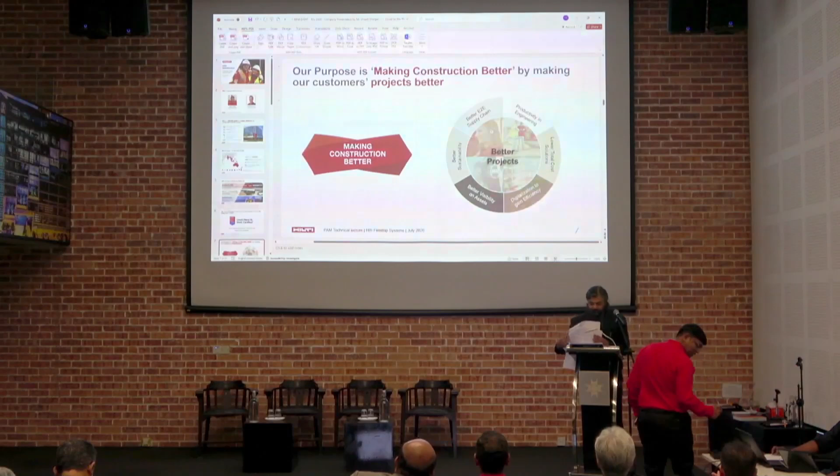Good morning, everybody. It's a pleasure to be here. Good morning, Architect Chong Lee Siong. It was a pleasure to meet you today morning, and welcome to all the PAM members. So my name is Kranti. I know architects like precision, so...

52.17% of my entire life, I've been an employee of Hilti. Hilti is a company that has been established for 85 years. So 28.24% of Hilti's tenure as a company, I've been an employee. So I can see some architects already calculating my age. Yeah, so I have the pleasure of presenting to you Hilti as a company. I always jokingly tell my colleagues, my blood is Hilti red. So for the people who have not yet calculated, I am 24 years with the company now. So I'm 46 years old.

I will take you through in the next 5 to 7 minutes about what Hilti is. Hilti was founded in 1941. There is no full form for Hilti. It's a family name. It's a family-owned company based out of Liechtenstein, with a revenue roughly around 6.4 billion.

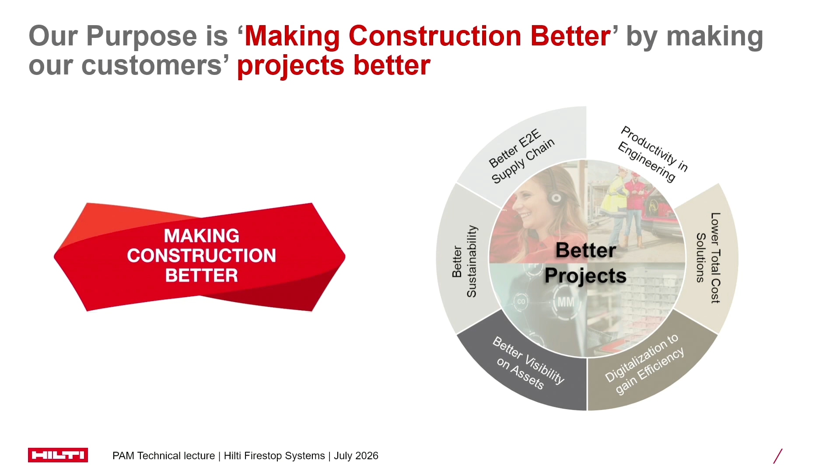So Hilti is actually not just an RE500 company. It's not just chemical anchors, it is not just firestop, it is having hardware, software, and services. We call it a one-stop shop. Hardware, we speak about from precision tools, measuring tools, to hacking, drilling, all the way up to fastening, support systems, and fire-stopping material. So we have the full range. If I'm not wrong, we are one of the only, if not the only, contractor supplier or partner who has this full wide range of portfolio. So that is just product.

When we speak about software, we have different softwares to help or work with the construction industry. We speak about asset management, from tools on the job site to cranes to even small things like air conditions and laptops. We have an asset management software which is quite successful in Malaysia. We have FieldWire, which is helping in collaborating on the job site. And then we have, specifically for engineers and architects, what we call PROFIS Engineering software, which is a code compliant anchor design system.

And when we speak about services, we don't just stop at hardware, having world-class, top-class hardware. When we are investing 7.21% of our revenue in R&D, we don't just speak about software, but also holistically serving the customers. From repair services to consulting services, meeting the customers in the office, meeting the customers at the job site, meeting the customers in seminars like this.

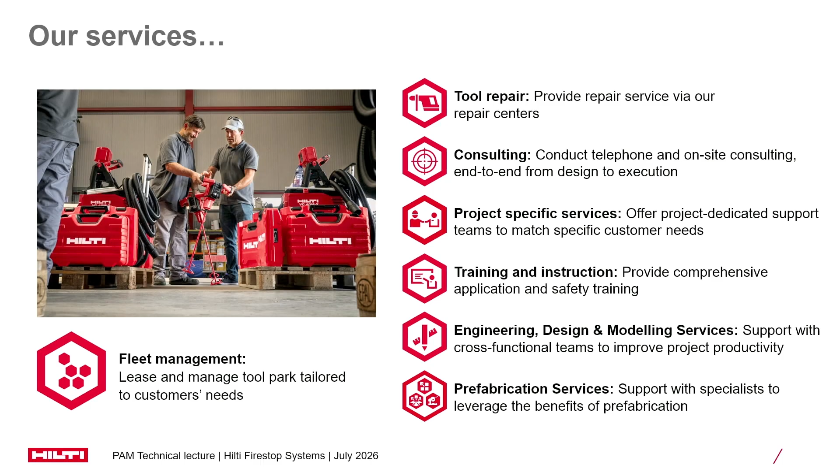The name of the program is Spec to Site. That's the way we work. But I would like to invite my head of engineering to take you through the program of Spec to Site. So Umesh, welcome. Thank you very much.

Good morning, everyone. My name is Umesh. I'm the head of engineering for Hilti Malaysia. As Kranti said, more than half of my professional life is with Hilti. So 18 years I'm with Hilti now, working with India and Malaysia. In Malaysia, I've been here 4 years plus, working in different roles. So that's my brief. And today I'll speak about Spec to Site, which is a program from Hilti.

I'll explain briefly how we support on all the services, on selection of products, how we specify, and how we also ensure that the specifications get translated into reality at the job site.

So generally, as an architect, when you do drawings or specifications, we tend to observe that many times your specification, drawings, or recommendations do not exactly get replicated at the job site. There is some mismatch here and there. So to resolve this problem of miscommunication and mismatch that you face daily at the job site, we as a team from Hilti support all the architects and also the contractors to culminate and complete the whole cycle of application at the job site.

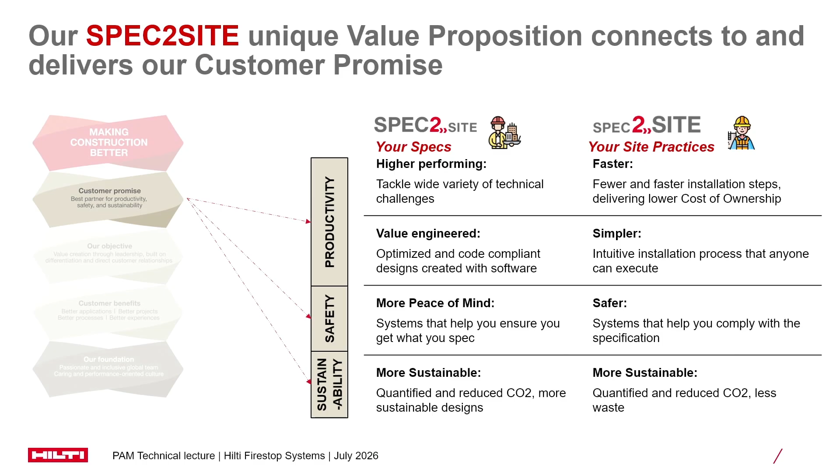And these solutions are sustainable also for a long term. I'll go into detail. From the contractor side, the tools and equipment we supply, and the trainings we provide, bring more safety, and the solutions are simpler and faster. So overall, all the solutions we bring in, from the specification up to execution, are sustainable.

I'll go into detail on the spec side. On the left side, we have multiple product lines or systems which can help you select for a very complex situation at the job site. Your job sites can be simple, medium complex, or very complex. Our systems, which are UL based, FM approved, or EN standard based, can help mitigate all this complexity at the project site.

With the help of BIM or AutoCAD drawings, we can help you create BOQ and also good standard specifications, which help you and the contractor at the job site get more clarity on how to do the application and what product lines or system solutions we are applying there.

There may be situations where the application is out of the scope of your codes and standards. We can arrive with engineering judgment, which is based on the testing we do and the extensive experience and R&D we have. We can produce documentation of engineering judgment so you can create your specification on a strong basis.

And this gets applied through BIM, AutoCAD drawings, or any other medium you'd like to specify at the job site. This brings a lot of peace of mind, ensuring that whatever fire rating or safety measures you want to achieve through the application is applicable through the specification.

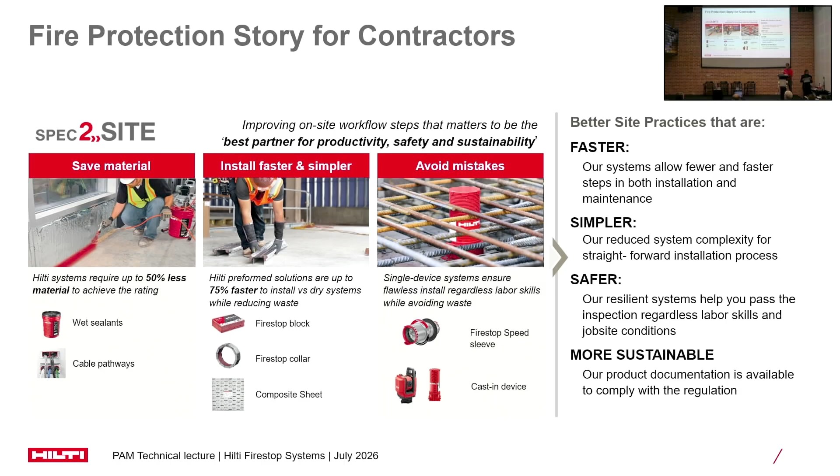So the spec side covers right from the design or concept stage of a project, where we can specify as per code methods. We can provide all the general notes, specification text, and typical drawings.

We have an online fire stop selector. If you go on the Hilti website, you can find a fire stop selector where you drop down your condition and country. For example, you're doing a project in Singapore but sitting in Malaysia or Thailand, you can just select your country, and it will come out with the local design methods. Based on the application, you can select what Hilti system, UL or FM based, you require. This FireStop selector is free of cost.

You can use it on our website anyway, and our engineers can help guide you to select the material. Then we have trainings, which are individual—we can arrive at your office and provide training, or to contractors, on how to do the application, how to select the system, and basic information on the FireStop topic.

We have estimations—for example, through BIM or AutoCAD solutions, we can help you do budgeting or bill of quantities estimation prior to execution of the job site, so you can have budgeting done for your tenders. Once you prepare drawings for your projects, or have a BIM model, for example nowadays data center or infrastructure projects run on BIM, we can support through the BIM solution how material quantities can be estimated and specified.

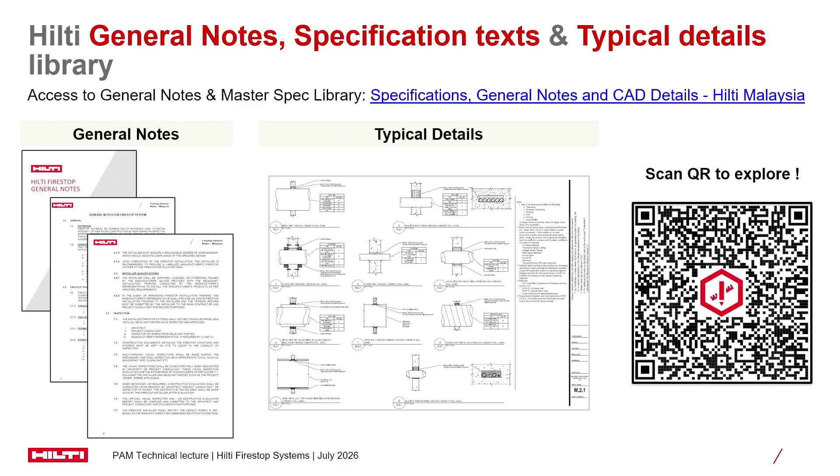Our product baskets are set into three categories: through penetration, linear construction joints, and facade joints. All three applications are covered through Hilti systems, whatever your project may be - data center, industry, hotel, commercial, or residential. Everything can be customized, including critical industrial projects with long cable runs that need fire retardation. All these applications comply with UL system, EN system, MS 1183, and our product lines are BOMBA certified.

When BOMBA comes for inspection, we can provide the inspection guide. All these product lines have additional attributes like acoustics, paintable area, dust-free or airflow-free options. These attributes aren't only associated with fire rating, but can help your projects - for example, a data center needing airflow control can get airflow ratings, or if you want dust-free environments, we have preformed devices that are completely dust-free.

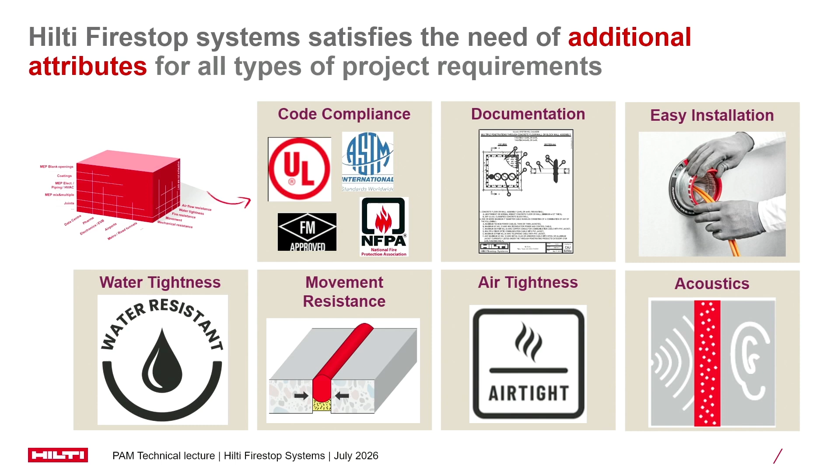Lastly, many of your projects nowadays are green buildings, so we can help with CPD and LEED certification points, where our products are associated with points that can immediately help cover your LEED requirements. This helps with your sustainable projects or green building certification.

When we complete the project, we have inspection guides. This QR code displayed outside lets you download the inspection guide, so whenever you go to the job site you can tick mark that all steps have been done, ensuring the application is correct. If there are deviations, we're always available at the job site to help mitigate challenges. This QR code is on the booth and also available on our website, and our engineers can come to your office for any services.

In summary, Spec to Site is a program from Hilti offering end-to-end solutions for your complete project cycle, supported by Hilti's engineering team and sales team. That's a brief overview from my side. Thank you, and we can now move to the next session.

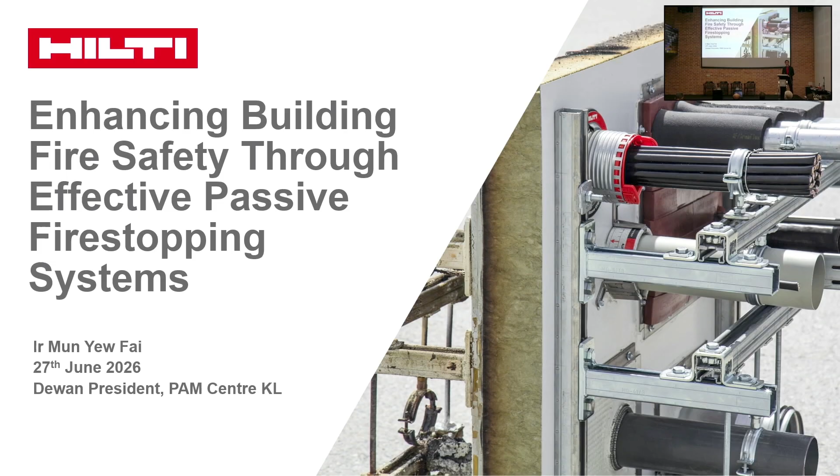So today I'm going to talk about how we actually enhance building fire safety through effective passive fire stop solutions.

Topics that I will cover today is why do we need to look into passive fire protections, and what is fire stops that help on the passive fire protections, and where do we use it, as well as how do we actually apply it correctly for our project and also implementations, and also sharing a little bit with you how do we look into the best practices for fire stopping applications. And I will wrap up with a little bit of summary there.

Now, passive fire protections, why do we need it? Taking the statistics that we are aware of from the Fire and Rescue Department, this is actually taken from 2018, where there were already 50,000 fires happening and attended by the fire departments alone in 2016. And this actually involved 107 people who died during the fire events. And not only human life, there's also damage to property and assets estimated at 2.5 billion.

And throughout the years, the awareness is increasing, but still there are many areas that we need to consider and take care of in terms of fire safety. If you look at the photo on the right-hand side, it's actually the EPF building caught in fire in 2018. The facade is actually caught in the fire. Luckily, there were no major problems, and now it still remains in a damaged state.

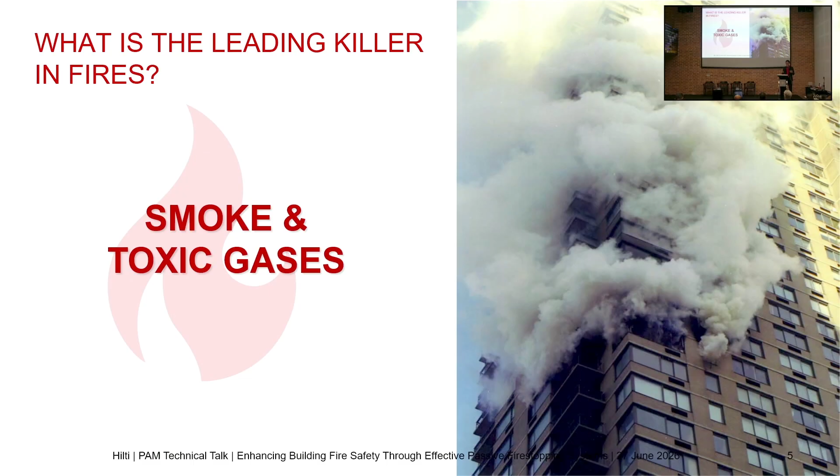All right, so basically during fire events, the major killing factor is not only the fire, but it's actually also the smoke and toxic gases being generated. So when the fire happens, it burns all the materials that are combustible and creates all kinds of carbon monoxide, causing people to inhale it and get killed during the events.

And there are also some fire statistics that we took from international references. For example, there are actually 3.8 million fires happening per year worldwide, and about 45,000 actually died during these fire events. You see that actually 3 out of 4 fire deaths are actually caused by smoke. So we cannot just think that fire will kill, but instead the smoke and also the toxic gases generated also cause people to inhale and die during the events.

And also an interesting fact: about 57% of fire deaths are actually not happening at the origin. This is because when caught on fire, people will escape, so that's why people will run away. But if the escape route is not safe, death is caused not only by the fire, but also by the smoke. Actually, the smoke travels faster than the fire. So this is why a lot of the time, most cases of death are caused by the smoke.

This is just an illustration of how important fire compartmentation is. Typically, 5 minutes is all you get. Fire, and especially smoke, spreads through a building much faster than most people think. Every year, about 3.8 million fires occur worldwide. While damage to assets is in the billions, the yearly death toll amounts to 45,000 persons. Much of this could have been prevented if correctly installed fire protection had been in place.

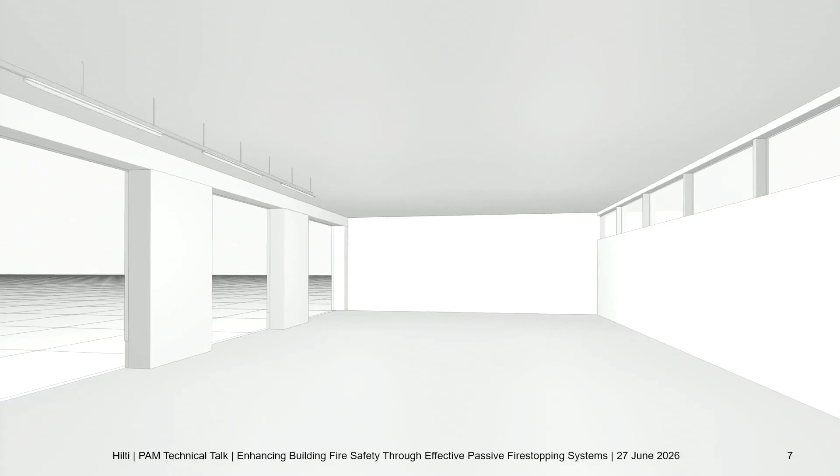Architects, planners, engineers, and building owners are responsible for effective fire protection. Oftentimes, they do not realize that fire stop is not an option—it's a clear legal requirement, and negligence or improper execution is a violation of the law. Nearly 60% of fire deaths are not in the room of the fire's origin, and 3/4 of all fire deaths are caused by smoke. When there are through-penetrations in walls and floors, toxic smoke easily spreads to adjacent rooms.

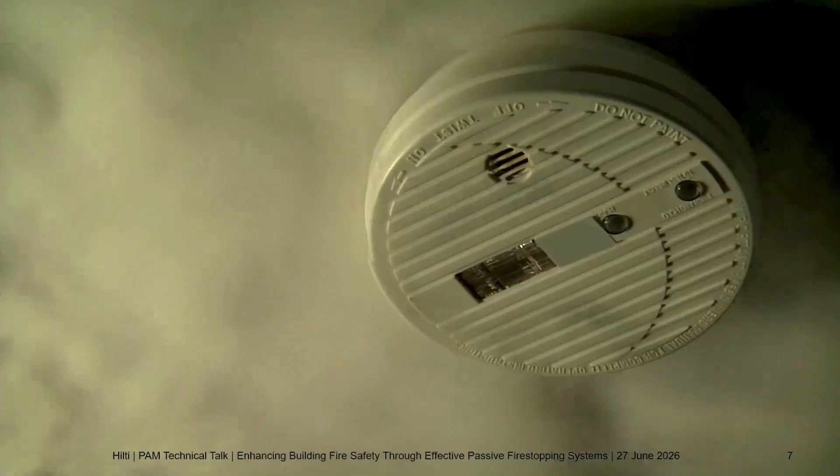The keys to effective fire protection are both active protection, such as detectors and sprinklers, but also passive protection. Passive means that penetrations in walls and floors have been sealed with approved fire stop products. This principle is called compartmentation. When installed correctly, fire and smoke won't be able to spread from one compartment to another. This allows for safe evacuation of people and protects valuable assets.

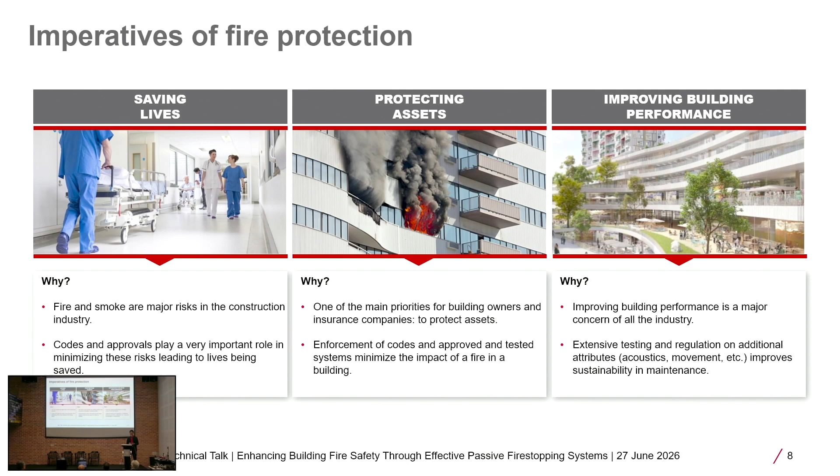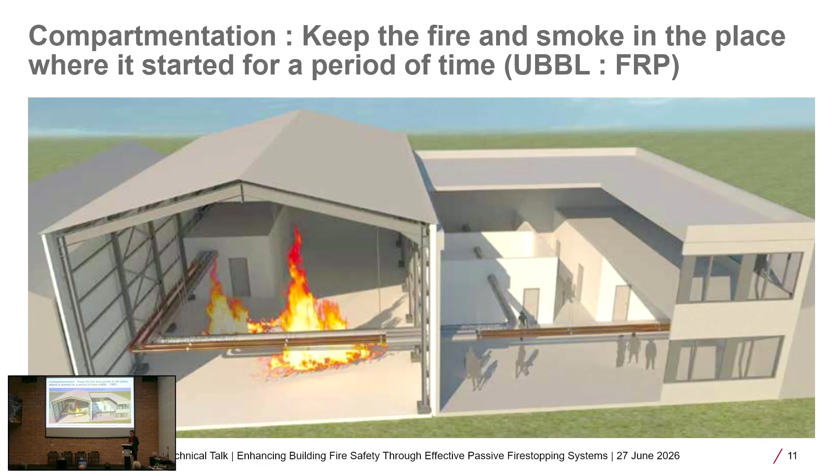Now, like what I mentioned just now, basically compartmentation is to keep the fire and the smoke in the place where it started, for a period of time. So with this, we call it fire rating or fire resistance. This is just an illustration: fire happening at the left compartment, and we want to provide effective compartmentation so that the people on the right-hand side can have sufficient time to escape and go to the safe assembly point.

Now, this comprehensive guidance can also be found in the Guide to Fire Protection Malaysia 3rd edition, and today it's also available for purchase at the PAM booth outside there. So if anyone is interested, you can actually get a copy from PAM Executive. Over on the right-hand side, just to give you an idea, the comprehensive guidance on passive fire protection is actually in Chapter 4. And if talking about compartmentation specifically, that's Chapter 4.3.

And referring to the same guide, Section 2.3 mentions that the building should be considered as a whole. Here you can see that passive fire protection is actually very important to consider during the planning stage as well as the design stage, so that it can be used to mitigate fire hazard and fire risk. It further mentions that subdividing buildings into compartments, both vertically and horizontally, is to contain the outbreak of fire, smoke spread, and fire spread. So an effective passive fire protection can only be achieved during good planning and design at the beginning, as well as design construction, so that it can provide the basic functions of the building for fire safety.

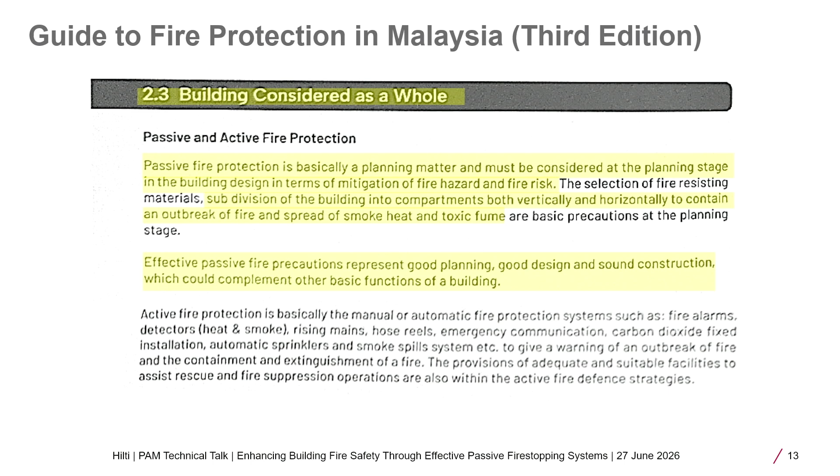Speaking about compartmentation, a very important element is fire rating or fire resistance. The compartments that form this compartmentation are basically walls, floors, and partitions - vertical and horizontal elements. Fundamentally, when fire happens, we need to ensure the building is stable and structurally sound. For building design, engineers also need to ensure buildings are given the right fire rating through the Eurocode design, designing the slab, column, and wall to be fire rated according to Eurocode.

Secondly, it's also important to consider integrity - the ability to resist fire and smoke spread from one compartment to another. This is another very important consideration. Last but not least is insulation - the ability of thermal insulation to resist within a temperature limit from the exposed side to the unexposed side. All these three elements form the fire rating, and you can get further reference from the guidebook.

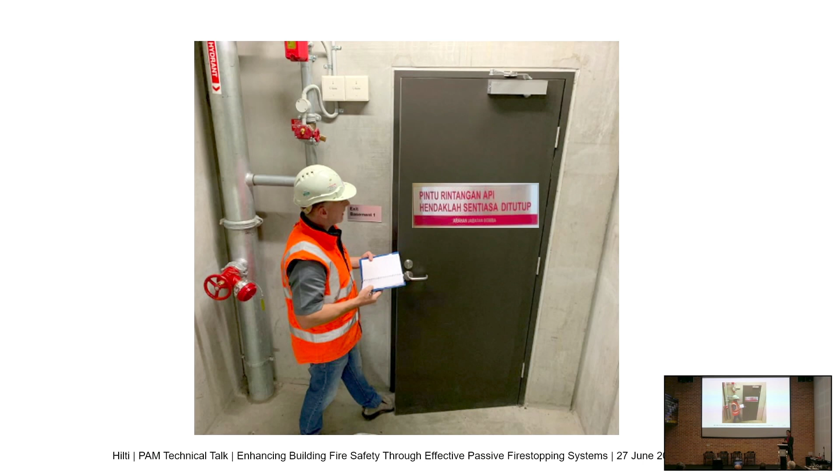Within this compartment, you can see a live example of why there's an instruction here. It's actually a very important message to everyone to ensure this door is closed at all times, to ensure effective compartmentation and fire protection. This is also Arahan from Jabatan Bomba. It may look very simple, but it actually forms a very important safety measure for our building occupants.

Apart from door openings, there are many hidden areas we may not be aware of but are actually essential. All these unavoidable openings and gaps are caused by fundamental MEP services - mechanical, electrical, and plumbing - which provide services for our building's performance and basic functions, like air cons, electricals, and water supply. Unavoidably, these are required to pass through the compartment wall as well as the compartment floor. When there's an opening or gap, it must be sealed and remain sealed to maintain its fire resistance or fire rating.

Here's an example - penetration can happen at the wall, on the floor, as well as at the joints on the building side and at the top of wall joints. Sometimes when designing commercial buildings with full height curtain walls, there will always be gaps at the perimeter. All these weak points need to be sealed with the right fire stop solutions.

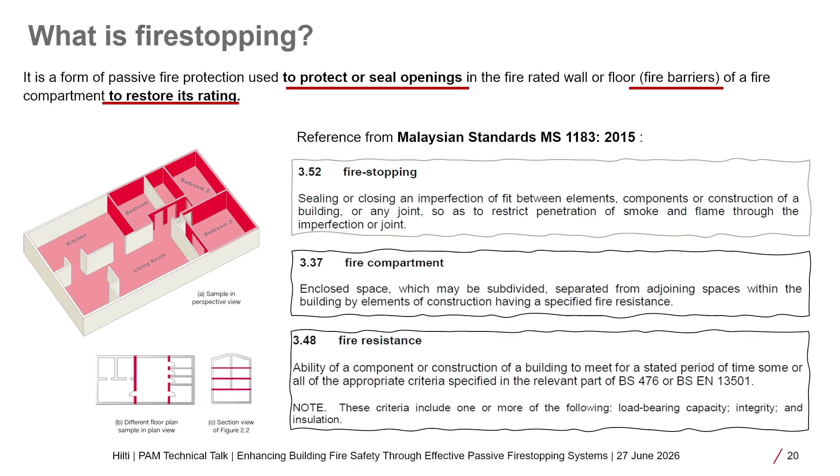So we need to understand what fire stops are. Basically, it's a form of passive fire protection to protect and seal the openings and joints on the fire-rated wall to restore its fire rating. For a more precise definition and guidance, you can reference the Malaysian Standard MS 1183, section 3.52, which states that fire stopping is to seal and close the imperfection between elements of any joint to restrict the penetration of smoke or flames.

And how does the fire stop system actually get the rating? Basically, it's through the system testing. Fundamentally, as Mr. Umesh mentioned, there are 3 major applications regarding fire stop systems: through-penetration, joints that can happen in any part of the building, and perimeter edge of slabs which is mainly relevant to curtain walls.

So the testing actually makes reference to international standards. If we're talking about design requirements complying to the Eurocode, then the testing would be EN 1366 Part 3 for through-penetration and EN 1366 Part 4 for joints. If we are handling projects with clients based in the US, we probably need to refer to American standards. Then the testing standards for fire stop systems also make reference to ASTM as well as UL. For example, for through-penetrations, the ASTM will be E814 and also UL 1479.

Locally, we also need to refer to the testing guidelines approved by BOMBA. There's also a lot of testing still referring to generic testing standards such as BS 476. Just a little additional information here - BS 476 are actually very legacy test standards, and over in Europe they are also, part by part, being phased out. I understand it's going to be totally phased out by 2029 or 2030. So the current trend is more and more towards updated testing standards with the Eurocode standards and also ASTM.

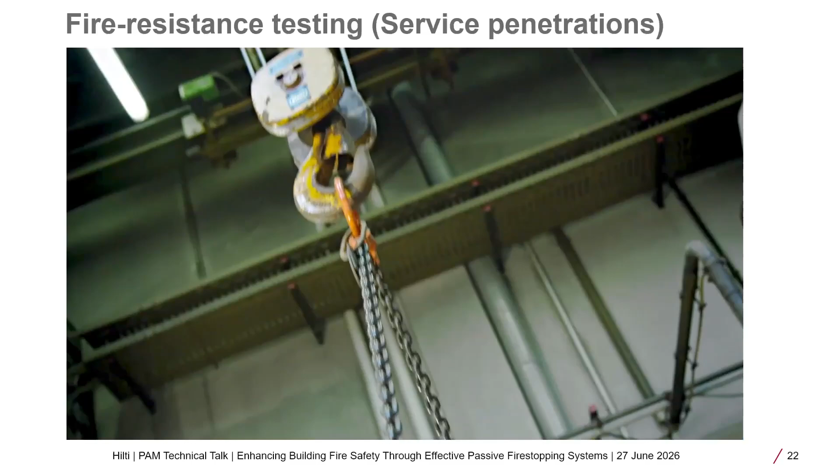So let's take a look at the video of how the testing is being carried out. All installation of fire stop systems needs to be according to the guidelines and testing standards. For this case, it's being installed as a mixed penetration, put into the furnace, and then exposed to the ISO fire to the relevant requirements. Then we take the measurements and also take the record to see its performance.

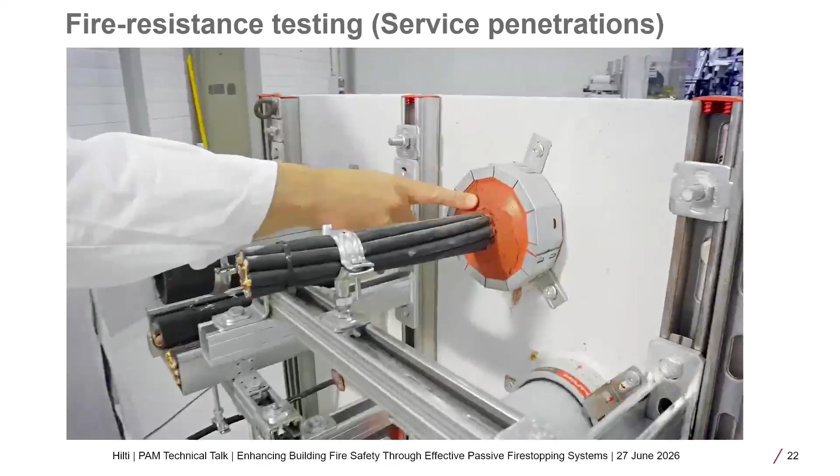After testing, for this hose stream test, additionally by ASTM, we need to ensure stability after the things being burned off. So an effective fire protection system is one where the exposed side will be totally damaged, but the unexposed side should still remain intact. This is the wall fire protection system where the unexposed side is still intact and the fire side is all damaged. So it needs to serve to contain the fire within the compartment.

Here's an example of system testing under European standards, showing how they look into fire ratings. After the testing, they will come up with comprehensive technical reports. It needs to contain all kinds of testing information like pipe diameters, thickness, the material, and last but not least, the fire rating. So 120 indicates 2 hours, and 60 means 1 hour.

System testing is applied not only to through-penetrations but also to joints as well. Similar system testing is carried out but according to different guidelines. For joints, it's also catering not only for fire safety but also other attributes like movement capability. Sometimes buildings will be subjected to deflections during their service life - subject to wind load, seismic activity, and so on. So all this kind of movement or displacement is being tested alongside the fire safety perspective.

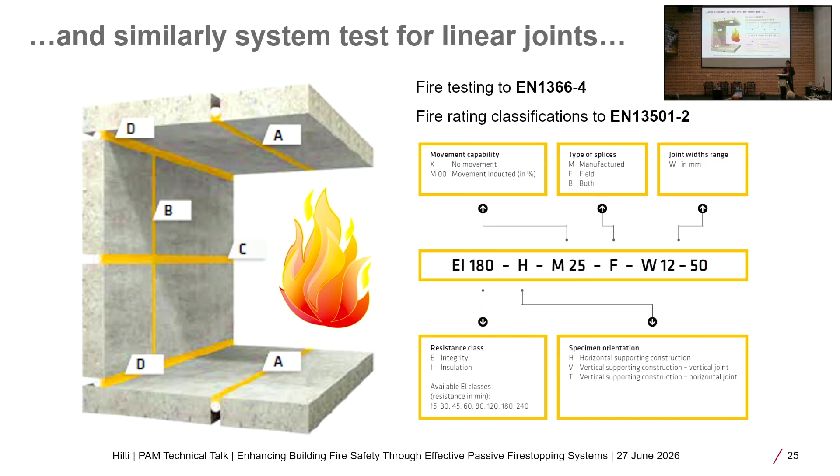For everyone's information, fire stop is not just sealants - it can come in different forms and types. Some basic fire stop solutions include mortar, sealants, foam. We need to look into the requirements and different considerations like the penetrants, the fire rating, the sizes, opening, and so on. Throughout the years, with advancing technology, more innovative products are being created to serve the same passive fire protection purposes. We call these preform or factory assembled devices - it can be composite boards, sleeves, blocks, cast-in devices, and so on. These form a more productive and enhanced safety solution in terms of installation and the passive fire protection perspective.

Among the materials, there are different kinds being used: intumescent type, ablative reactions, endothermic reactions, and insulations. Among these, the most important terminology or material type is intumescence. It's actually the ability of the material to expand when exposed to elevation of fire or heat. So why is this important? Let's take a look at how it works.

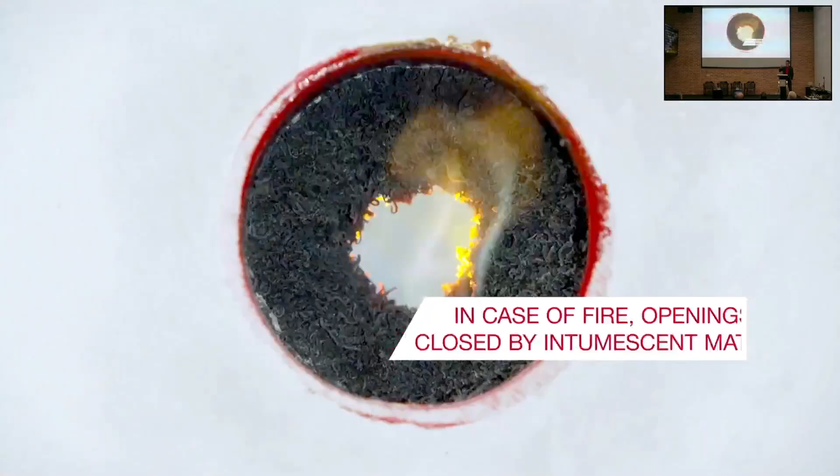Imagine there's a combustible penetration through the fire-rated wall, for example a plastic pipe. When it's being burned, the plastic pipe easily melts off, leaving an opening. We require the fire stopping to have intumescent material that expands and closes up the opening to prevent fire or smoke from spreading to the other side of the compartment. This is an illustration of how intumescence works.

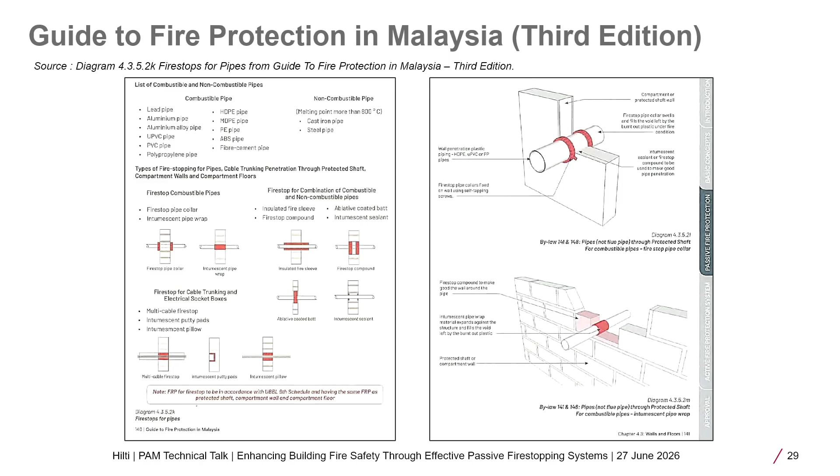I'd also like to share that the Guide to Fire Protection provides comprehensive guidance on how we consider fire stop systems. You can refer to diagram 4.3.5.2K, which shows fire stops for pipes for passive fire protection. Specifically, it mentions that for fire stopping of combustible pipes, the fire stopping material is required to be intumescent, and this can come in different types.

Depending on the design requirement, if you're catering for especially large pipes, you need a fire stop pipe collar, because you need to contain the fire stop material and force it to expand inwards. There are also different types of forms available.

For fire stopping, basically we can look into two major applications: the first is through penetration, and the second is joints. All of this needs to be treated as a system solution, to tackle the very complex penetrations passing through these fire-rated elements.

Putting it more simply for your reference, joints can be looked at as wall joints, top wall joints, edge of slabs, and so on. On the other hand, common applications for through penetrations include pipe penetration, electrical cables, and very complex M&E services passing through fire-rated walls and floors.

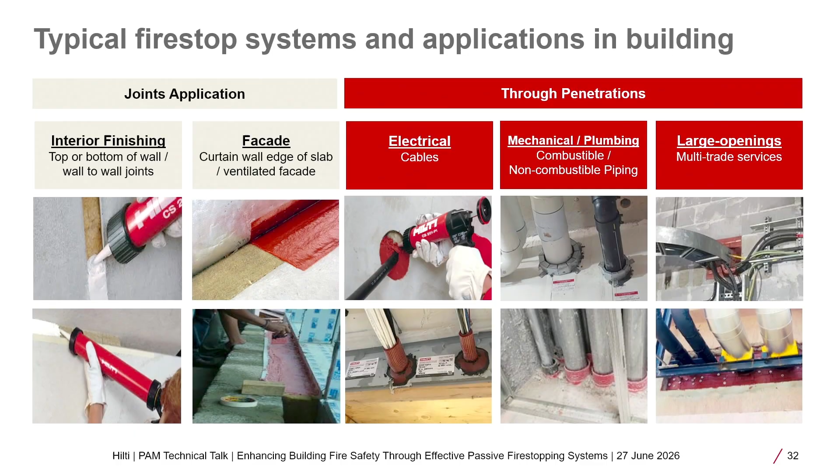After looking into what fire stopping is, let's look at where it's used. As I explained, there are many unavoidable gaps and openings penetrated by MEP services, very commonly found in modern buildings.

All these services run not only horizontally above us, but sometimes also vertically in some utility rooms at the sides of buildings, which are covered by the room. Nevertheless, all of these are penetrated and require openings to pass through, and all these gaps and openings need to be sealed up.

Fundamentally, we need to locate all these weak points within a building so we can select the right fire stop systems to tackle them and provide the right fire safety for occupants. For example, sanitary plumbing, mechanical penetration by air cons, ducting, and electrical penetration are all very commonly found weak points in our buildings.

Not only can these fundamentals be found in buildings, but different types of buildings also require different attributes. For example, healthcare facilities mostly operate 24 hours throughout the year, and most of the time have a high level of occupancy by patients and medical practitioners, so the fire safety levels we need to address are much higher.

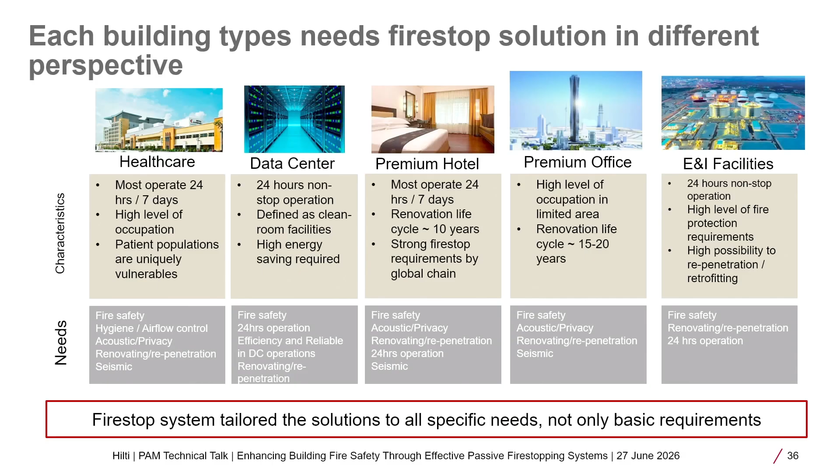So this shows how critical and important it is for us to ensure that fire stop systems actually work properly and effectively.

For reference, there are many critical areas in a hospital that require our attention and need to be protected with the right fire stop systems. For example, the surgery room, the patient room area, ICU, M&E shaft, and so on. All of these are critical areas we need to look into, and any gaps or openings we need to seal with fire stop systems.

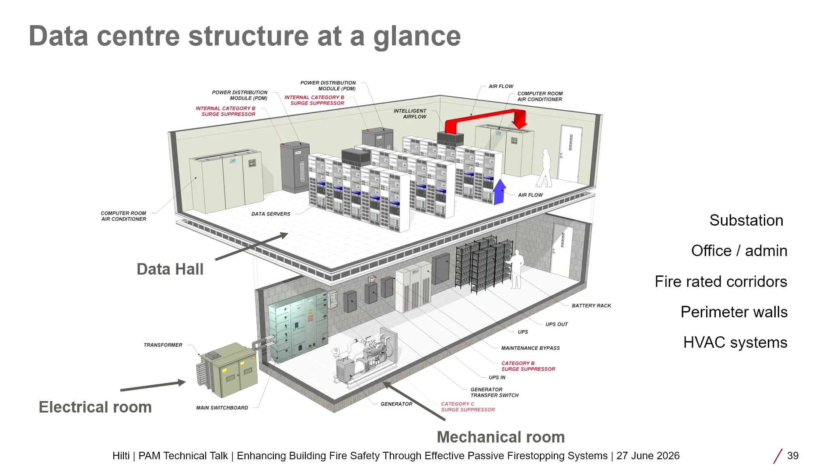Like I mentioned, data centers are a hot topic in the market now. Same as with hospitals, there are many different design conditions and elements we need to cater for. Fundamentally in a data center you always have the data hall, electrical room, and mechanical room. Other than that, there's also admin offices, fire-rated corridors, substations, and so on. All of these are essential and critical areas we need to cater for in terms of fire protection.

So just to give you an idea, not comprehensive but the most important elements - cable penetrations are something we expect in the data center halls. We need to think about something which can allow the cables to pass through the fire-rated elements, like cable transit, electrical penetrations, and pipe penetrations.

For data center infrastructure, normally we're not only looking into the basic design requirements, but some areas actually need to be fiber-free. So sometimes we also hear about design requirements like clean rooms. We need to cater for this kind of requirement when selecting the fire stopping systems.

So this kind of preformed solution actually fits perfectly with this clean room perspective. Because if you use the conventional sealant type, basically you need mineral wool as a packing material, and when there's construction inside this compartment, it will contaminate with fibers. So we need to think about using different innovative solutions to tackle the fire safety perspective.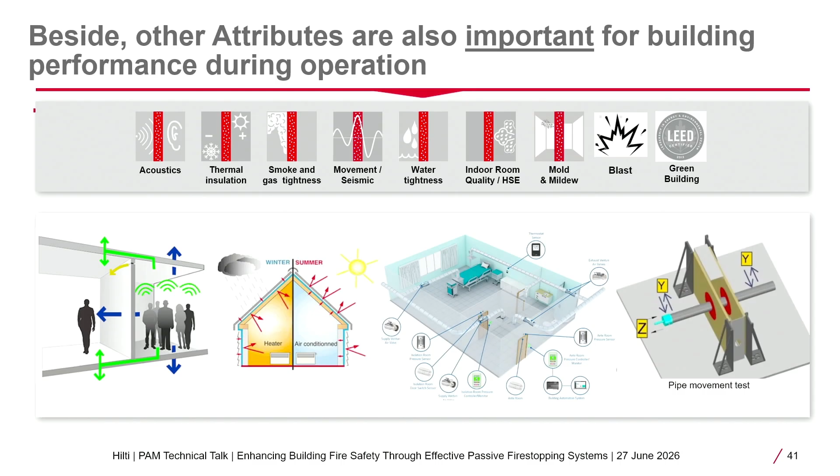Now, we know the solutions, we know the systems, and how to design them into buildings. But when it's not implemented properly at the job site, it doesn't bring the right intended functions and performance. So we also need to understand how it's applied at the job site and how to do it right.

Now let me give you an example and illustration here. This is a steel pipe penetrating through a wall with an opening of 230 and 2-hour fire rating.

We need to understand the design requirements from a fire engineering perspective, and the regulations from BOMBA and UBBL, and any other code of practice we need to reference, like MS 1183. So the three fundamental elements we need to look into are: assembly type - what type of building element are you requiring, whether it's a floor or a wall.

The question you need to ask is what type of building element, whether floor or wall, and what construction is being penetrated - what material, for example a concrete wall, masonry wall, or other materials like sandwich panel, and what are the dimensions of the opening.

Secondly, we need to look into the penetrating items. As I mentioned, in a building we fundamentally have M&E services - it can be ducting, electrical conduits, cable trays, and so on. We need to understand all of these so we can select the right fire stop solutions to tackle the fire safety perspective.

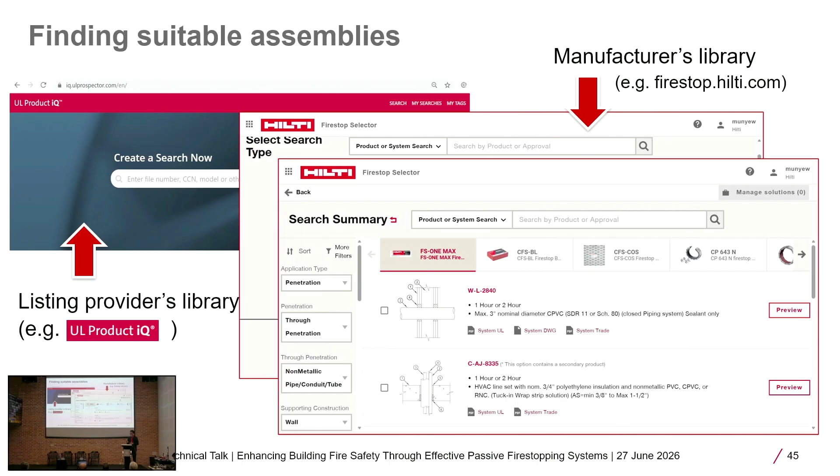So if you ask which type is suitable, for information, from BOMBA's perspective, they are accepting the testing standard from America as well as the testing standard from the European standards. So it also comes back to what are the project's requirements and how do we better advise our client. Sometimes the client is from America, then most likely the specification and design requirement could be fully referred to the American standards.

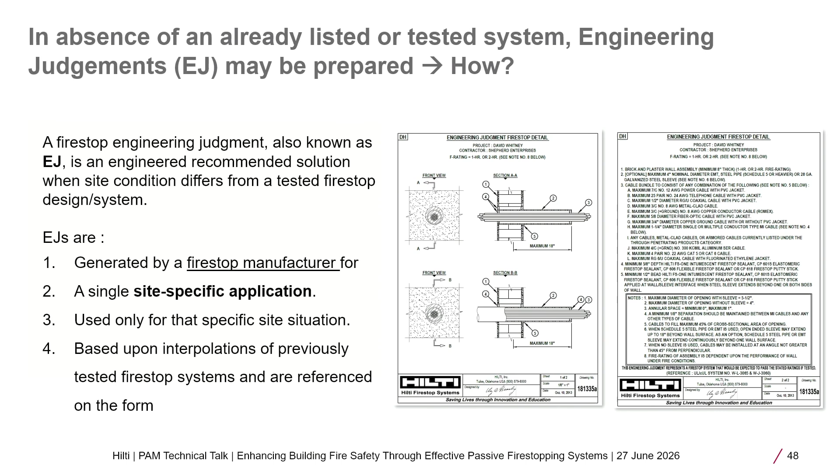Understanding how to install it is also very important. Fundamentally, we need to know basic information like what are the fire-rated elements being penetrated, what is the penetrant, and also what fire stop system to refer to. For example, this case is referring to the UL listing, and there's always a system UL listing reference number that you can cross-check and refer to.

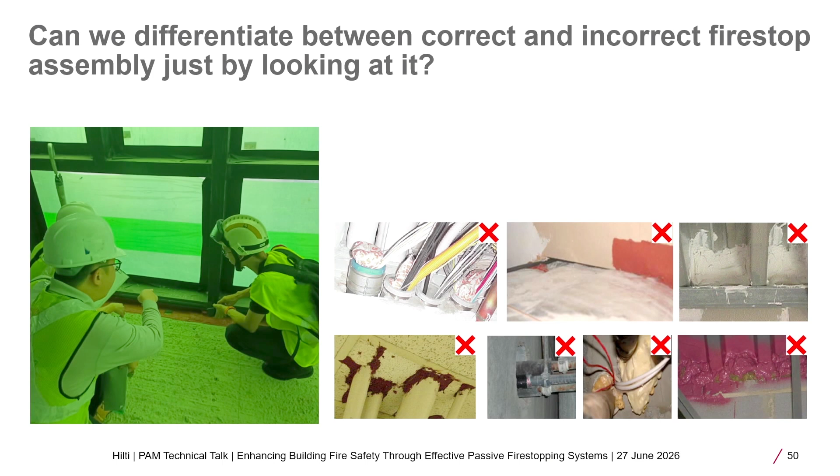The test scenarios featured in this video were created in UL facilities, designed to simulate realistic configurations and fire progression when the right solution is not being used or not installed properly. Each scenario includes a matched set of penetrations and joints: one fire stopped correctly using a UL listed fire stop design, and one fire stopped incorrectly using an unrated design. All correct materials and installations shown comply with UL 1479 for penetrations and UL 2079 for joints.

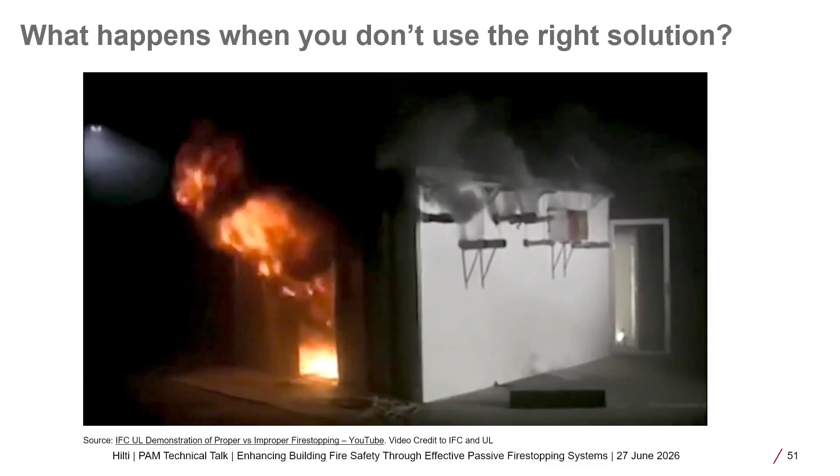These initial scenarios illustrate a very common mistake. While fire stop sealants have been used in the incorrect installations, they're not the appropriate products specifically listed for these applications. In the case of the plastic pipe, the non-compliant installation results in a complete failure of fire and smoke containment within a short time.

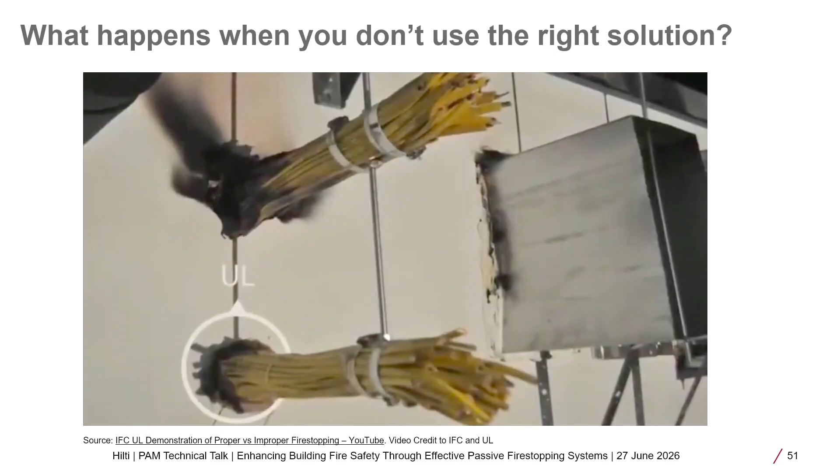For the tested cable bundle scenario, the non-compliant installation resulted in a considerable amount of smoke passage within a short time, due to the fact that fire stop putty listed as part of some tested cable penetration systems was used in a way that did not fully meet the tested system's installation requirements. Attention to detail is critical.

So you can see the effect of not installing properly, or not using the right fire stop solutions—you end up with easy fire spread and also smoke spread.

In order to detect all kinds of non-compliance, we can do it through site inspections. We need to understand the fire stop systems being considered during the design, the suitability of the applications, and whether it's being installed by a trained installer. We also need to understand whether the implementation and installation at the job site is being carried out by competent personnel or not.

During the field inspection, you can do a visual inspection by looking at the appearance. But if you're suspicious or not sure, you can also carry out destructive tests and repair later. Importantly, we need to document all the approvals or inspections accordingly for QA and also building maintenance purposes.

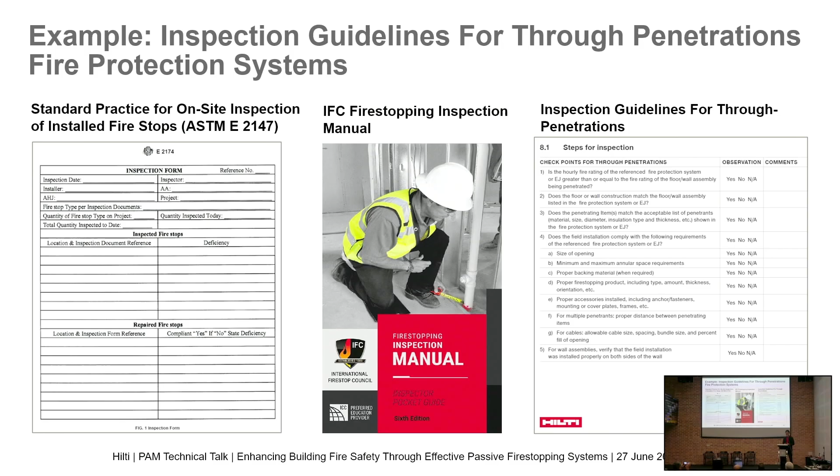Taking reference from inspection guidelines from international standards like ASTM E2147, which provides a very generic inspection form, and similarly the International Firestop Council, which also provides the same perspective in their inspection manual—through these references, we as fire stop specialists and manufacturers came up with a more comprehensive and relevant through-penetration reference for these inspection forms, to help industry practitioners better implement inspection at the job site.

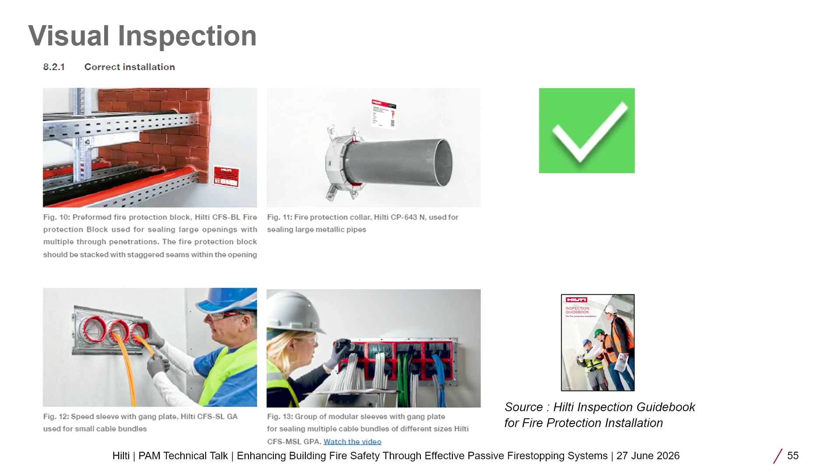Let me give you some of the best practices we can implement for fire stopping applications. Like Mr. Umesh mentioned, we recommend an approach called spec to site. During the design and planning stage, we look into local design requirements from BOMBA, from the UBBL, from the Malaysian standard, then identify the right fire stopping systems and put a clear specification in our documents and requirements. This forms the basis of specifying the fire stop to counter weak points and gaps.

On the installation side, we also cannot forget—some measures you can take include ensuring installers are trained and follow the installation instructions from the manufacturer and according to the listing system. For good practice, it should also be inspected by trained inspectors.

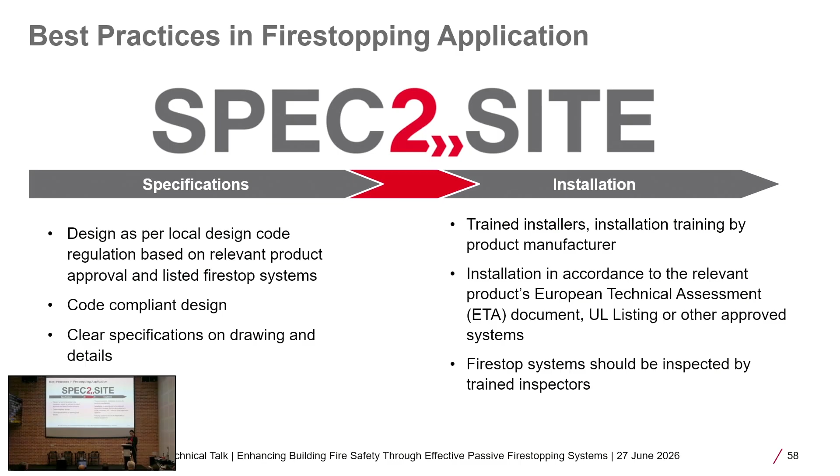And why this specification is very important. Basically, it provides clear instructions of its performance and intent for the passive fire protections, and it also forms the contractual documents to minimize the risk. So especially for us designing the buildings, we are helping clients ensure the buildings are designed to be safe and perform. Fire safety, we need to consider fire stop as well. It helps us factor in all the relevant clauses for this building to be constructed and functioning.

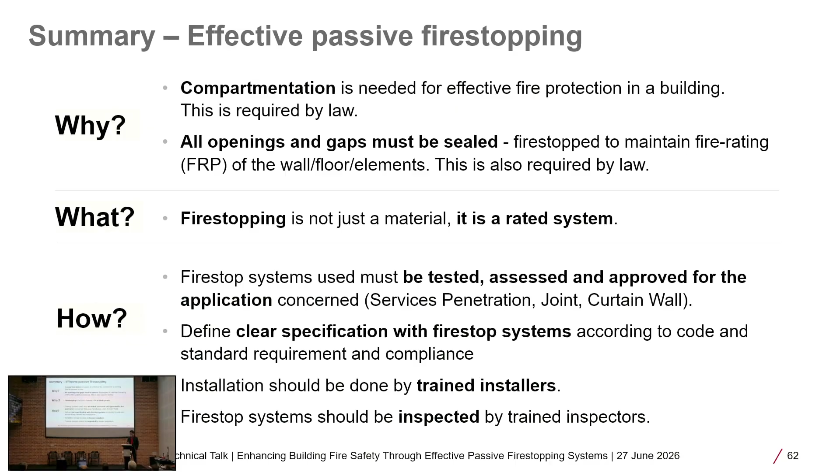And of course, fire events can happen anytime, anywhere, including where we live. Remember, we actually live in the building more than the time that we are outside. So it's very important that we ensure our building is safe by effective fire stopping solutions, and then it protects our life as well as asset.

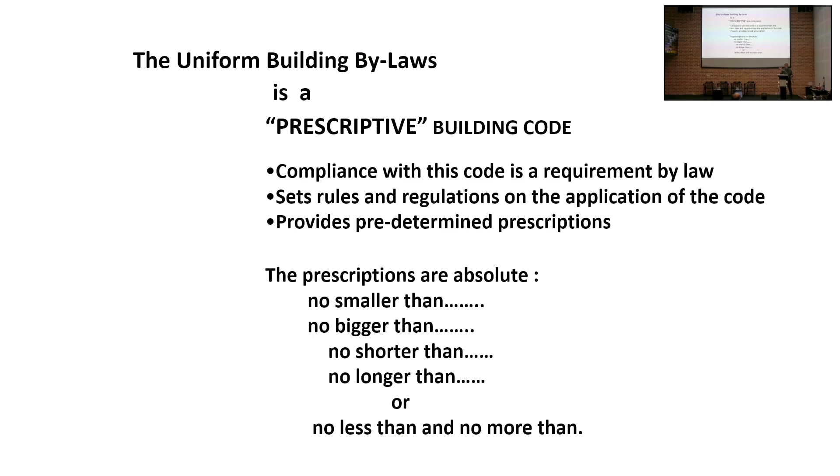Now, as we write the laws, as things became so complicated, we also realize the laws have its limitations. In order to support the law, we then need standards. We then need our guidebook, the red book. So please buy it. The red book is actually the guide as to how to interpret the laws and give you descriptions as to how you do things. And also, as a way of writing the law, to allow a greater degree of professional discernment or professional input, instead of just relying on prescriptions, where you draw the line so strictly you leave almost no room for professional interpretation.

The law has also, in a lot of things, diverted to refer to a standard. So instead of previously - I'll take an example of the bylaw number that talks about the construction of fire doors - if you all remember, back in 1984, when talking about how to specify a fire door.

If you refer to the law, it's written in a manner that says you shall construct the fire door in this manner - you shall use timber frame, you shall use this, you shall use how many layers of laminates, etc. You shall use wire glass, and the wire glass cannot be beyond a certain proportion of the surface area of the door, etc. So that was actually the law, would you believe it? But then we came up with the Malaysian Standards 1703.

MS 1703 is the standard on how you test a fire door, including the criteria, design parameters, and performance parameters expected of a fire door, and the manner of testing it. Fast forward to today, the clause on fire doors is replaced by just one sentence: all fire doors shall be constructed in accordance with Malaysian Standards 1703.

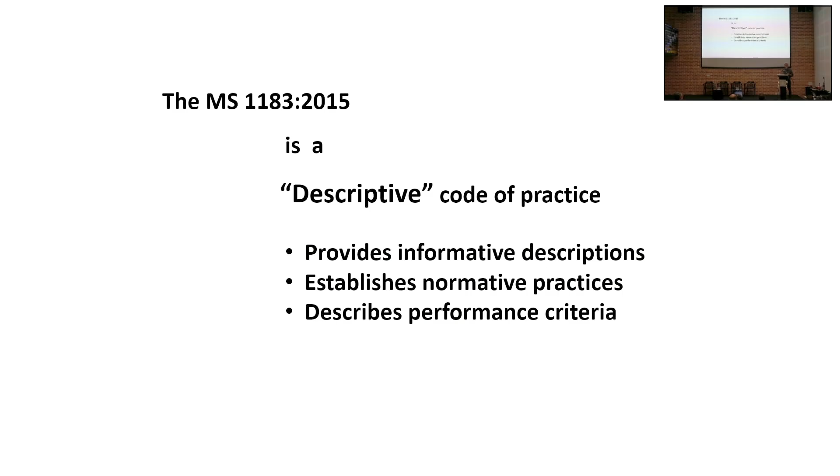As a main reference, we have Malaysian Standards 1183. So certain things will be pointed to, you have to comply with Malaysian Standards 1183. Like smoke control, we just say MS 1780 for smoke control, fire doors 1703, etc. That's how we should look at the law, read it, and apply it.

So we'll go back to the topic of today. Just two elements we're going to talk about, both related to fire safety: fire compartmentation and fire stops. First would be the elements of walls, and then the specific element of fire stop as to how it was prescribed in the UBBL.

Going back to the main concept first, the four main concepts of fire safety have never changed from the very first day. First concept is always evacuation, second is passive containment, third is active intervention, and last but absolutely not the least, access for firefighting and rescue. In the UBBL, evacuation, passive containment, and active intervention will have very specific references to first the purpose group of your building, then the size, volume, and configuration of your building with reference to the individual purpose groups.

So all of those things will be then classified into all the various schedules, UBBL schedules 5, 6, 7, 8, 9, and 10. And those will then give you very precise prescriptions on the design for evacuation, passive containment, and active intervention.

For prescriptions regarding access for firefighting and rescue, these are applicable to all building types. They are not specific to any purpose group because access to firefighting and rescue is universal. So the only reference will be to the height of the building and the volume of the building, regardless of its purpose group. That is the uniform application for all building types. Bomba does not discriminate.

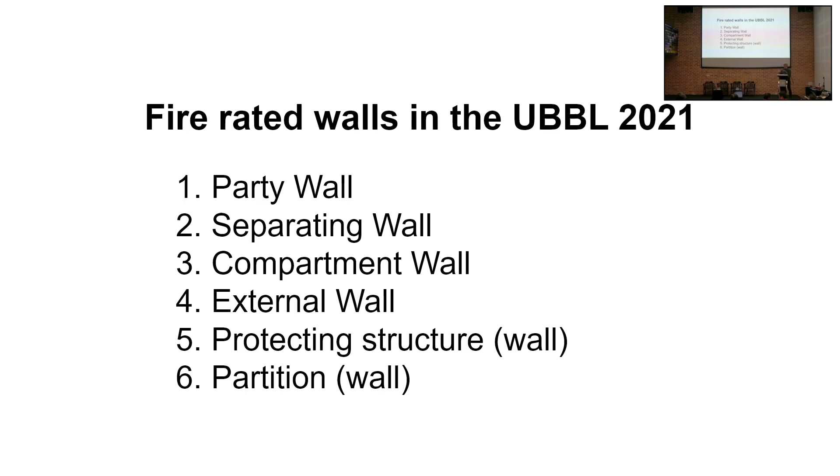Why make things so complicated? You know, you draw 2 lines, a wall is a wall - leave it to the contractor to give us the best price on how he wants to build the wall. No, it's not as simple as that, obviously. So we have to understand why this would be.

So first, what's the definition of a party wall? UBBL 2021, bylaw 2, interpretation, a party wall. You asked me to stop here for just a moment.

Fire safety is part 7 and part 8 of the Uniform Building Bylaws, right? Okay, what's the first clause number of part 7? Are you giving a lucky draw here?

No, sorry, my bad. All right, the interpretations commencing part 7 and part 8 is actually Bylaw 133. It just starts from there. Bylaw 133 will be all the interpretations of all the elements contained within part 7 and part 8.

So here, the interpretation of Bylaw 2. You're saying, hey, hang on a sec, why are we going to 2? Just now I'm mentioning we're talking about fire safety, why are we talking about Bylaw 2? Bylaw 2 is actually just the first part. So here's where the catch is. A party wall is actually a constructional element. It is, in some ways, related to its performance, related to fire safety, but its primary definition as a party wall is actually a constructional element.

That's why I think this should be in parts 5. The bylaw specifically is Bylaw 86, and I think 86 is in parts 5, which is a construction element. We do have to understand that, because in practice, I'm sure all of us have suffered the same problem. We go to Bomba, and Bomba says, 'Itu party wall ka,' and say, hey, hang on a sec, I'm talking about party wall, why is Bomba involved in party walls? They are supposed to be involved in a party wall in another way, but not directly to the reference of party wall. But anyway, let's just understand this first.

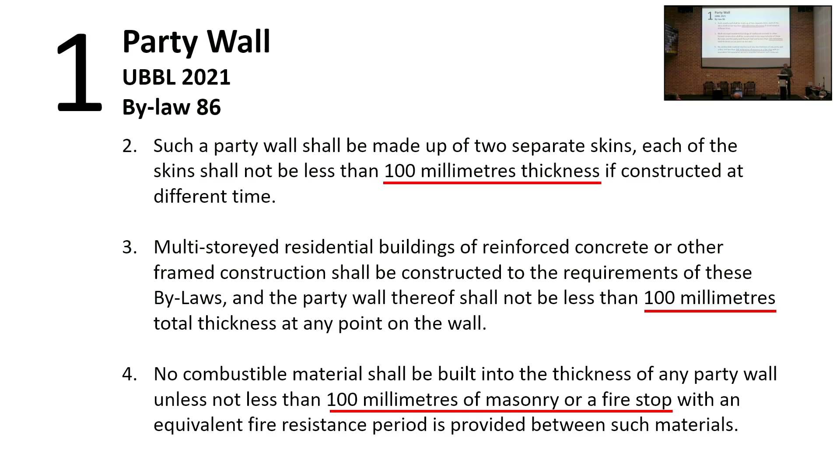And of course, should there be any other penetrations, they must be adequately fire stopped. That's where the fire stopping comes in. Okay, so this is party wall.

And 5 and 6 refer to the legal status of the party wall. So 5 and 6 should not be confused now with our fire stopping and the application of fire doors. Remember, we are still talking about a party wall - the purpose of the party wall, as we have mentioned, is to separate you from your neighbor.

It's a physical, private, privacy separation. You don't want to hear your neighbor, you don't want to see your neighbor, and you don't want the neighbor to touch the wall and the wall starts to flex and you see the neighbor moving along the wall. So you don't want that. You want something very, very solid, very firm, and almost no opportunity for the neighbor to be able to accidentally even knock down the wall and break into you.

But however, because this is a legal thing, if you and your neighbor decide to marry or agree to share the same house, you can actually then make an opening in the wall, or you can remove the party wall, because that's exactly what it is - a party wall separating you from your neighbor. So if you marry your neighbor, you say, hey, I don't want a party wall anymore, I'm very good friends with my neighbor now, or we're one family now, I don't want a party wall between the two lots. Yes, legally, you are allowed to remove it.

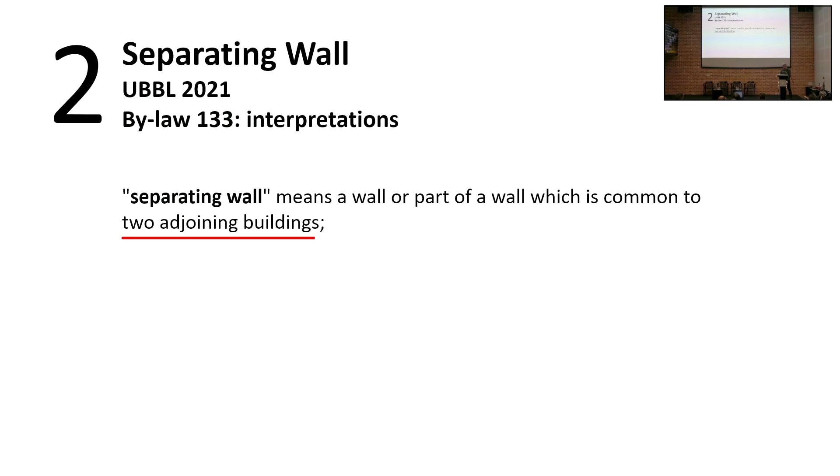Good, now we come back to Part 7 and Part 8, which is fire safety. A separating wall means a wall or part of a wall which is common to two adjoining buildings. Wasn't that the definition of a party wall? Yes, it is. But here, a separating wall on a fire safety method must have a fire safety performance criteria. So where you need a party wall, it shall also have to be constructed as a separating wall. This is where fire safety comes in.

A separating wall shall form a complete vertical wall separating any buildings. Nothing in this bylaw shall prohibit the passage through a separating wall of a pipe, etc., but it has to be fire stopped. In contrast to the function of a party wall, would you allow your neighbor to drill a hole in your wall and slide an electrical conduit through it, or let his main electrical incoming cable pass through your house and the party wall to supply your neighbor? You wouldn't want that, right? So as a party wall, that's not allowed. But from a purely fire safety point of view, you need a fire separation, so if you want to punch through anything, you have to fire stop it, as long as the integrity of the fire safety performance of the wall is intact.

This is where the separation of the definition comes in. Still on separating walls, any separating wall which forms a junction with the roof shall be carried above the upper surface of the roof to a distance of not less than 225 millimeters. So this is the key element that a lot of us are talking about.

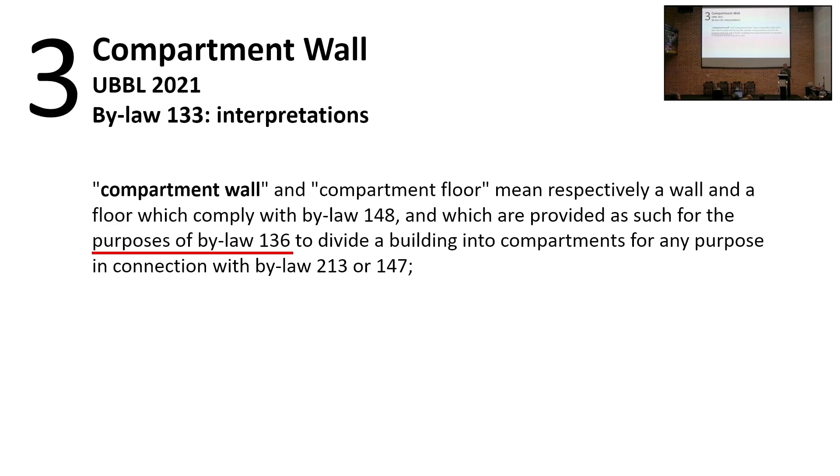Number 3, compartment wall. What is a compartment wall? A compartment wall shall mean a wall for the purposes of Bylaw 136, dividing a building into compartments for any purpose in connection with Bylaws 213 and 147. So primarily a compartment wall is specifically about fire separation. We started with legal party separation, then separating wall, which is the fire safety performance criteria of a party wall. Now we come into compartmentation, physically talking about fire separation between compartments.

A party wall would be very easy, right? Once you have adjoining neighbors, you have a party wall separating the buildings. But when it comes to compartment wall, this is purely now a fire safety requirement.

The primary kickoff for us to consider compartment walls would be in the fifth schedule. Because the fifth schedule gives you the full prescription on the limits of your floor area and the limits of the building volume, or the fire compartment volume, with regards to your respective purpose group and the size and scale of the building. So a compartment wall is primarily for the purpose of ensuring that the fire compartment limits are met.

As to how you apply a compartment wall, I think all of us will be familiar now. We have separate flats and apartments, and all of these individual components are compartmented, even though they don't exceed the fire compartment limit, separating different parts of the building with different functions or different purpose groups, and so on.

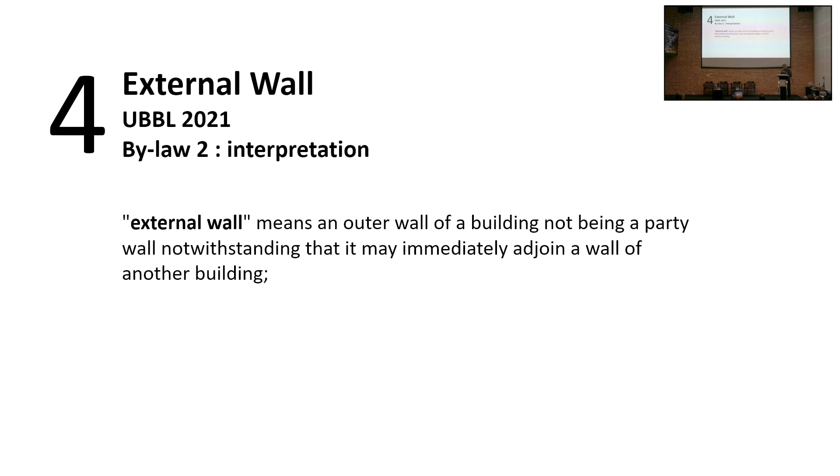But you see, under the elements of structure, when we talk about prescriptions of fire rating, we refer to everything under the elements of structure shall be fire rated. External wall is an element of structure. So you say, that's very contradictory, right?

So external wall, we actually have to refer then to the sixth schedule in terms of reference to the areas of unprotected openings. Right, so I've got a big window over here. How am I going to fire rate that?

Yeah, you're right. But however, if you're actually limited by the sixth schedule, in other words, your building in terms of unprotected openings to your immediate neighbor, which is several meters away, by calculation, if you need to reduce or to have a certain percentage of protected areas, that means we're limiting your unprotected areas on the wall - the surface areas that you're not allowed to have an opening, shall be fire rated.

That is the key, right? So the external wall would be which component of the external wall, up to the percentage allowed from the sixth schedule calculations. Those are the components that you have to have fire rating.

And that one then brings us to the additional clause on the external wall, the cladding on the external walls. We are all very, very familiar now on BS 8414, I hope. We've gone, BS 8414 is another whole topic of its own that will take another 5 hours to cover. But generally, BS 8414 is not about the fire rating of the external wall. We have to remember that.

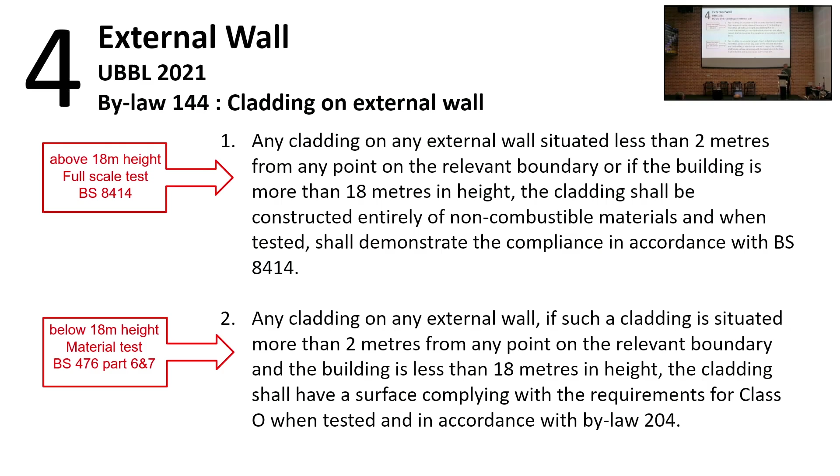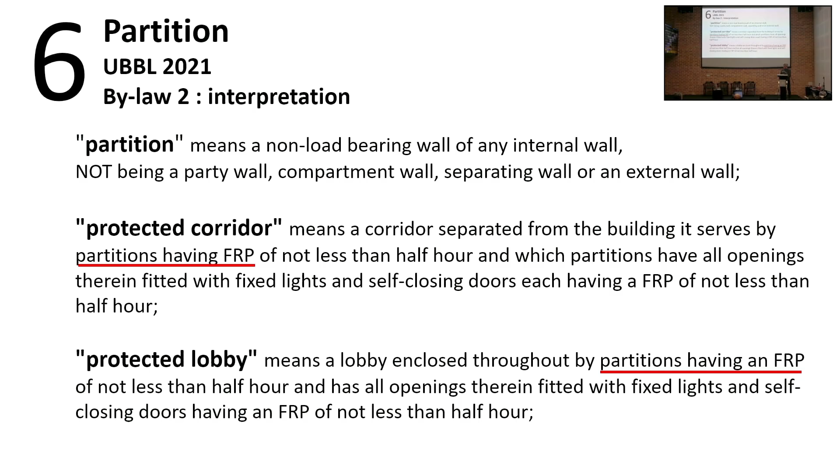And a protected lobby having partitions having an FRP of not less than half an hour.

Now, just now I was mentioning elements of structure. These are the elements of structure that will require a fire rating. So if you look through the schedule, and you find that your building of this size, volume and purpose group requires a fire rating of, say, 2 hours, which are the elements that you will have to construct to a 2-hour fire rating? It shall be all of these elements of structure. Any member forming part of a structural frame - anything that holds up your building shall be fire rated.

A floor, including a compartment floor - every floor, where so required, shall be an element of structure that requires the fire rating. An external wall - we just mentioned external walls need not be fire rated, but where required for the protected areas, it shall be fire rated in accordance with your calculations from the 6th schedule. Then separating wall, compartment walls, structures enclosing a protecting shaft, a load-bearing wall forming part of the structure, and a freestanding gallery within a fire compartment.

Okay, then the separation of fire risk areas. Now, specifically coming into walls, there's bylaw 139, which says that apart from the separation of different purpose groups, different apartment buildings, etc., down to the floor plan level, it is also necessary to have a fire separation if you identify specific fire risk areas - A to H: boiler rooms, repair shops, storage areas of materials and quantities deemed hazardous, liquefied petroleum gas, transformer rooms, flammable liquid stores, a shaft for an electrical riser except for ELV, and a cold room. A cold room is a very late addition in UBBL 2021.

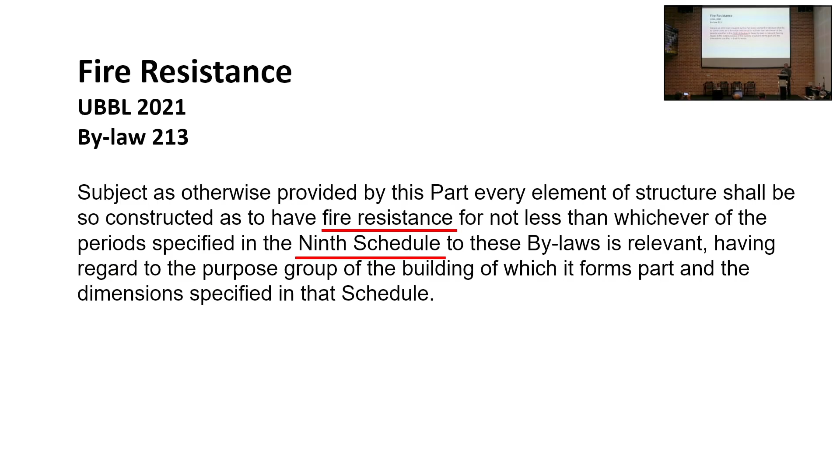So these are the very specific areas which may not constitute a different purpose group in your floor plan, but once you've identified these rooms, they are identified as separation of fire risk areas, and therefore you must have a fire separation. You must have the compartmentation, and the fire resistance as I mentioned. So for all the elements of structure in your building, you have to refer to the 9th schedule to locate your fire resistance rating, then apply it to all the elements of structure, constructed in accordance to the notional period of fire resistance given.

Okay, these are all very straightforward now. And the test of fire resistance - we are still kind of stuck with BS 476 for obvious reasons. All these were carried over from the old British standards, British ordinance. But it's okay, we have to understand the limitation of 476, which I will describe to you later. So the test of fire resistance is in accordance with the various parts of BS 476.

Now, so we come to the crunch. We are now designing a building. So we got the bylaws, we understand all the different descriptions or interpretations of all the different parts of a bylaw. So now let's come to this: party wall, or separating wall, or compartment wall.

And this is the thing that I believe all of us are having problems with Bomba, right? You go to Bomba and say, this is a 230 brick wall. Then they say, excuse me. Okay, so let's look at this.

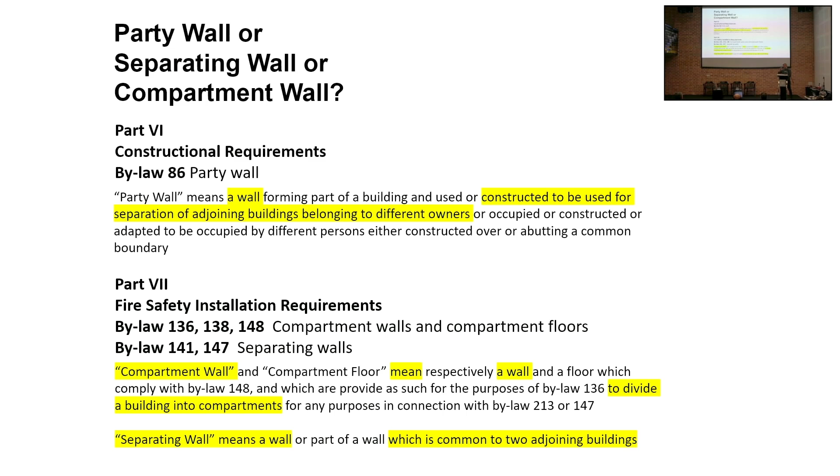Okay, so bylaw 86, party wall is a constructional requirement. It's to be constructed to be used as a separation - a physical privacy separation, a legal privacy separation from your neighbor. Whereas for fire safety installation requirements, you would require a separating wall, or in some cases it would actually have to be constructed as a compartment wall, depending on the situation.

So the way we work is this: as an example, on a terrace house in landed property, it's very obvious - you've got your different lots. So the wall separating you from the neighbor is, first and foremost, primarily a party wall. From a fire safety point of view, it has to be a separating wall. So you construct this wall to be a party wall, to comply with the physical characteristics or physical prescriptions of a party wall, and also comply with the performance parameters expected of a separating wall.

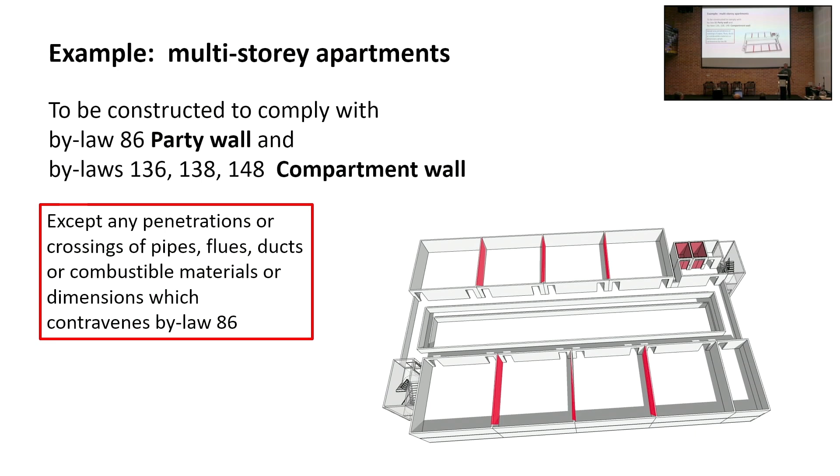Now we look into the fire applications already. What is the purpose, what is the understanding on how we can maximize the efficiency of our building design insofar as fire safety is concerned.

So what is the reference to the height of the building insofar as fire safety is concerned? It is access for fire safety, access for fire appliances, access for firefighting and rescue. And this is common to all building types, regardless of your purpose group or size of the building. As long as the building exceeds a certain height, you require risers for firefighting. Your building exceeds a certain volume, you require perimeter access for the fire appliances, etc.

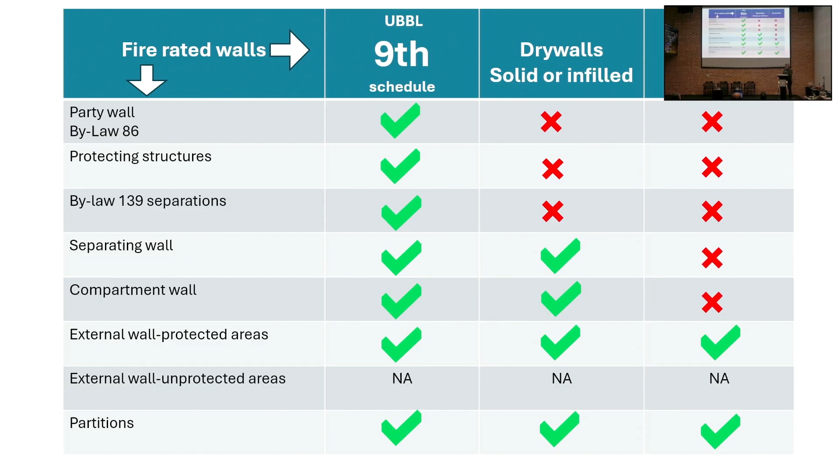To go straight to the point, I came up with this chart, so it's very easy to refer to. Generally, for party walls, you are not allowed to use drywall construction of any sort — it has to be masonry. In respect of clause 86, it has to be masonry, or if you use another form of construction, it eventually has to be really solid and of the nature of a masonry wall.

Protecting structures — these are the hard areas of the building. You don't change your protecting structures as your building goes along. An exit stair will remain an exit stair. A fire shaft will remain a fire shaft.

Then bylaw separations, the 139 separations, all the high-risk groups — you cannot use drywall construction. Then for everything else, for separating walls within your own buildings, compartment walls, you may use drywalls, but they have to be of a solid and infill construction. It cannot be hollow, or it has to be fully filled in with the proper insulation, tested to Malaysian or BS standards 476.

Then on external walls for the protected areas, yes, you can start using drywalls. For unprotected areas, not applicable. And for partitions, yes, go ahead — you can start using drywall construction.

Okay, so this is a very quick summary. The details you can pick up quite easily. A lot of the manufacturers are also very in tune with this already, so you get on to them and they'll give you good advice.

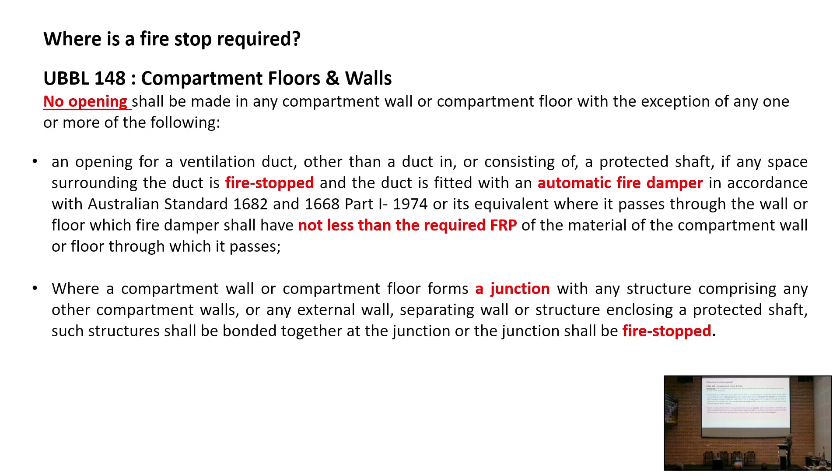Now look particularly at the prescriptions of the UBBL. First, the fire stop, we all know, has to be a fire stop, and it shall not be less than the required FRP. So whatever fire stop you put in there cannot be less than the prescribed FRP, right? Okay, good. Now, what is a fire stop as far as the UBBL is concerned?

First, it's to be a non-combustible material. Secondly, not to restrict essential thermal movement. So two criteria here: one is the physical fire stopping - the material itself shall be non-combustible. Secondly, it shall not restrict thermal movement. I think I've gone through this quite a few times with you, so we all understand how we apply fire stops.

So what are the required properties - the physical properties required of a fire stop? Since the UBBL stops at just two elements, first it has to be non-combustible, secondly it shall not restrict thermal movement. That's it. So we're kind of stuck, right?

So now let's refer to Malaysian standards. Malaysian standards adds in a little bit more. It says whatever it is shall take into account the size and nature of the gap and anticipated differential movement, and in any case the fire stop is to be tested in accordance with BS 476 Part 22.

We all know the limitation of BS 476 - you can't use Part 22 to test a fire stop. It doesn't work in that manner.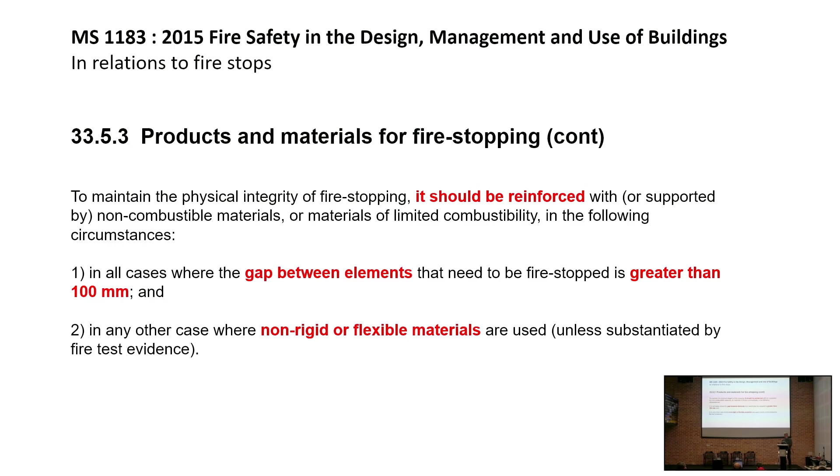So if the gap, especially if it's a horizontal gap with a vertical penetration, you don't want to just stuff the hole with cement sand plaster, right? So Malaysian standard says it should be reinforced. And where you require thermal movement and all that, non-rigid or flexible materials are to be used. So again, these are prescriptions.

So now we look at that - what are the specific properties required of a fire stop? Deemed to comply is actually cement mortar, gypsum-based plaster, cement or gypsum-based vermiculite. So are they non-combustible? Well, yeah. But what is non-combustibility? In the UBBL, we are referring to BS 476.

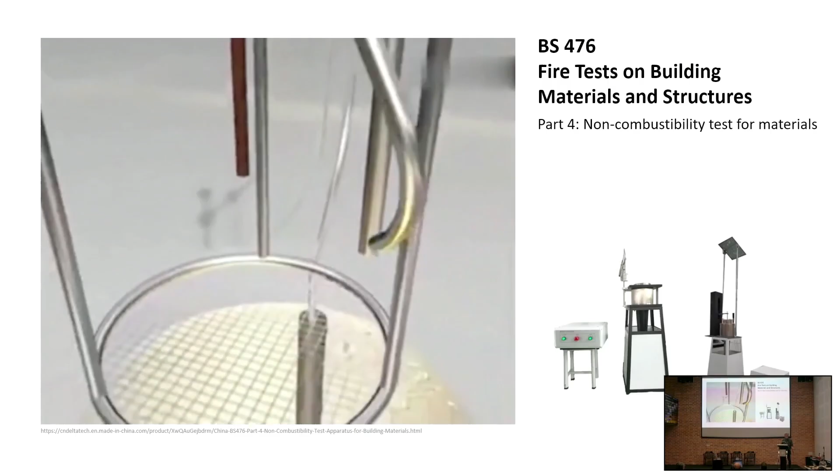So BS 476 non-combustibility - there are primarily two tests here, Part 4 and Part 22. Part 4 primarily - this is just a very simple test where you have one small sample material and just ignite it for like 15 minutes to take the reading on combustibility and flame spread. So okay, as the material, you'll say these three deemed-to-comply materials are non-combustible.

Right, but is it the same fire resistance period as the wall or the floor? How do we determine that? Well, BS 476 refers to Part 22. But Part 22 is actually testing... okay, Part 4 is non-combustibility. Sorry, I'm going backwards.

Part 22 is the method of determination of fire resistance of non-load-bearing elements of construction. It's actually tested in a large furnace with a wall. So how do you test that material? Just the material functioning as a fire stop, we don't. Like the test that has been shared with us, you have to do the entire assembly, put it into the furnace, and test the whole assembly, not just the material itself.

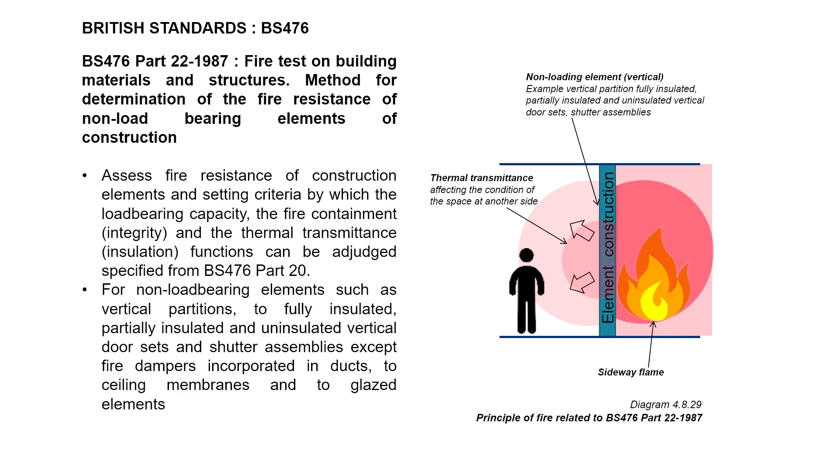So Part 4, BS476 Part 22 is say you're testing a brick wall. So there's no possibility for us to be able to test that fire stopping material using this part.

To summarize, these three deemed-to-comply materials are non-combustible, but is it the same fire resistance period as the FRP of a floor and wall? I can't determine that - you're the architect, we are specifying it now. Can I sign on the Borang C3? I can't, because I cannot determine that cement sand plaster is of the same fire resistance. Allow for thermal or physical movement, I can't determine that either. Structural support for large gaps, I can't determine that either.

So what do we do? We have to then go for the systems. And this is where industry partners like Hilti - I won't name your competitors - come in. But this is what we should be demanding or requesting from our suppliers now. So I'm an architect, and I said I do not know how to comply with all of this. So please, let's work with the industry partners and learn. As architects, we are signing on the forms, so let us be fully informed.

I'll give you an example now. I'm talking about a project, how we went through the process. I took that project as a learning curve - a sharp learning curve. I engaged myself with an industry partner. I will not name who they are, but it becomes quite obvious as I go down.

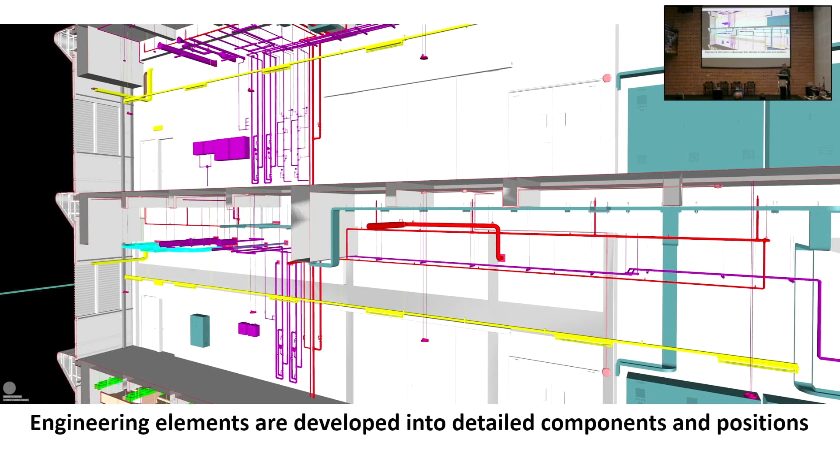Then from there, these are developed into detailed components with precise positions - knowing how many pipes there are, the hierarchy of when all these things come together, which utility gives way to which other utility, which one takes priority, which one should go above, which one should go below. So all of these things are worked out in that manner - we're talking about fire stops actually.

So step two: after we've determined the design, after we've done the initial placeholding, after the engineers have populated the placeholdings and we got the details ready, we then have to specify first what are the various fire stop materials or assemblies that we will require in our project. So specifications - this is where we go to our suppliers, industry partners, and start identifying.

I've got all these situations. We've got the BIM model already. We have identified all the different situations. We start to collate them together, put them into the respective groupings of requirement specification, thermal movement, size, nature of penetrations, etc. So we do the initial specifications. Then, of course, we have to check at that point - can this thing get Bomba certification or not? Is it approved for that particular purpose?

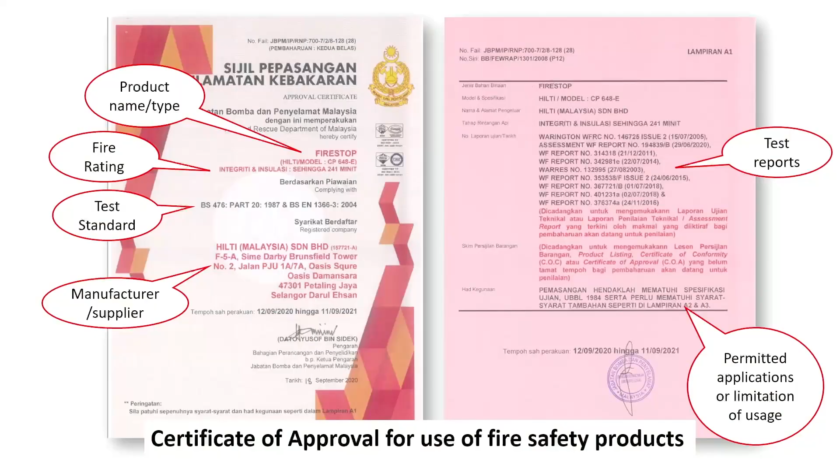Is it approved for the application that we want? Very important, because when you sign a Borang C3, you're actually signing on one element, but is that element the same element that was being used in that particular location? It's so important, so we have to go through all of these things.

Then step three is actually the hard work. That's the real documentation, and this is where we go around the entire model that we've created. We have to start identifying, okay, that one, give it a code number. What is it that we are specifying? We literally have to do that. This is the hard work part. We spend a lot of sleepless nights here.

After we do all of this, the good thing is that with BIM, if we documented it correctly, we can then generate the bill of materials. It will give us the location, the unique identification of that particular composite fire stopping, the product name, and the type, what material it is, the fire rating required, the dimensions and size, the type of penetration, and for the benefit of the QS in preparing the actual quantities, it comes out with the actual materials and the quantities. So the hard work gives us this, and it speeds up a lot in terms of our physical documentation. It really helped us a lot.

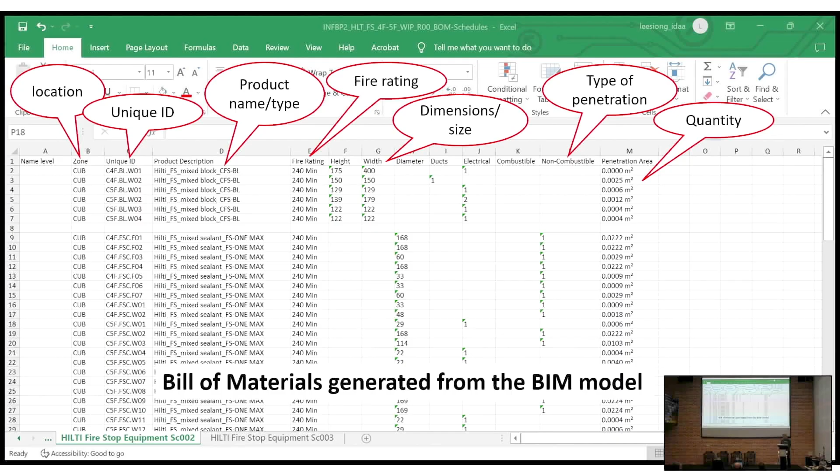Then step four will be the construction. This is where you physically build what you've documented in BIM. With the BIM model, it's very easy. We can actually walk to the actual site itself, and we know exactly what the item is supposed to be, what it should look like. If it doesn't look like anything how we documented in BIM, I think we got some problem here. So this is where we start to see all the different applications coming together - the collars, the mixed blocks, the composites, the structural framing composites, etc.

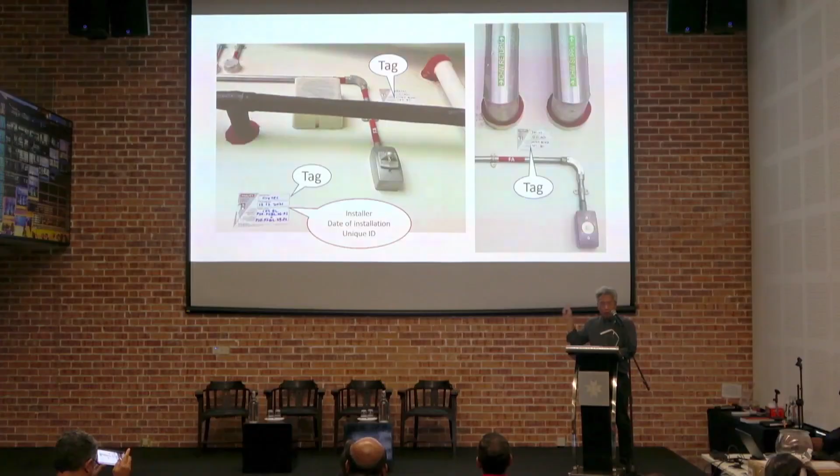Then after we build all of that, we have to start doing the inspections to ensure we got the right thing in the right place. Once we clarify and we're happy with the inspection, we get a tag. I was promised 8 or 9 years ago that we are supposed to have a QR code - I'm still waiting for that. Never mind, it's okay. So LOD 500 already, but okay, the tag is still manual.

It's okay, the clients are not complaining. So we did manual coding, but of course we already got the original BIM schedule that we're using for reference. So after we tagged it and all that, great.

Then the hard part - we had to call Bomba in for inspections. Thankfully, at that time, Bomba was still not too well versed with all these kinds of things, so it was more like a learning process. We actually had to point out to them what we did, and Bomba was appreciative. Now I heard that Bomba is going to be trained very specifically - don't train them too hard. But we went through this, and it was actually a very sharp learning curve for Bomba also. We said, ada barang ini, and they were actually very surprised that we took the effort to document it in this manner.

The C3 submissions stacked up about that thick, because every location got one form. So then, of course, finally the C1, C2, C3. After you get through all of this - step 7 - we celebrate, for a job well done, so that our team can go home and sleep peacefully at night, knowing that we have specified it correctly, we have built it correctly, and we have certified it correctly. Thank you.